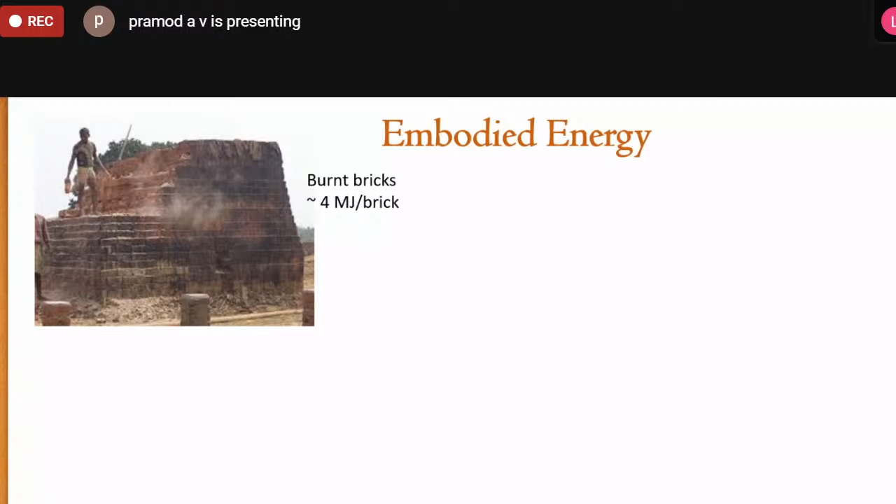We need to look at embodied energy in buildings. What do we do here? We try to understand the materials and see what kind of energy input is necessary. For example, burn brick needs quite a bit of fuel, whether coal or firewood, relating to around 4 megajoules per brick. So is there an alternative? That's the question. Then look at steel production, which consumes about 28 megajoules per kg, and sand and aggregates also consume energy.

Glass consumes 16 megajoules per kg. This is interesting to understand. When glass is used in a situation like Bangalore, where summer temperatures rise to around 36 degrees centigrade, how do you look at the building performance? Glass allows light and also allows heat. So the issue is that we heat the building and then need air conditioning to cool it.

Our energy costs are going to be much, much higher. So is it an intelligent way of designing buildings? In cold countries, maybe Western countries where temperatures are less, they use glass to heat the building, many a times calling it a solar room. So their requirement is different. They have to reduce the consumption of energy in terms of heating the building. But I don't know why we are using too much glass, and glass consumes so much embodied energy.

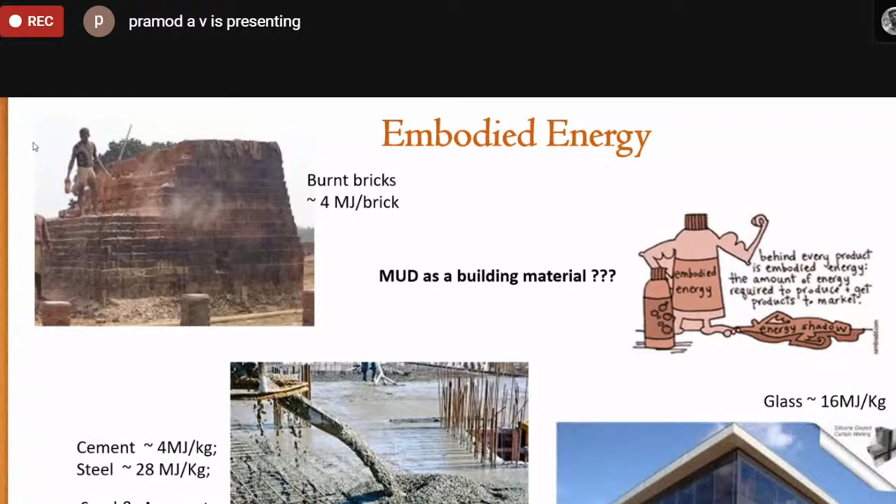So all these lead us to look back and understand what is it we should look at. Mud as a building material, why not? So how do we look at this issue? We will look into the techniques of stabilized mud as an alternative to burn brick. What happens here is cement and lime get used as a stabilizer, and there is no burning.

Reduced embodied energy using cement and lime. If we quantify the energy required to stabilize the mud, we use very little cement and lime, which relates to about 30% of the energy that goes into burnt brick. So we conserve 70% of the energy used in making burnt brick.

No plastering and no painting required. That is another interesting area wherein we can reduce cost and also reduce material consumption, while getting very good wet strength and durability. This is possible - we can definitely get a stabilized mud block, or any other mud technique, that will give us the required wet strength and durability.

But it is good to understand when... sorry. Oh, I see, I think there is... are you able to view every slide properly? Yes sir, the screen is visible. Okay, full screen is visible. Okay, last two points like plastering and painting not required, and good wet strength.

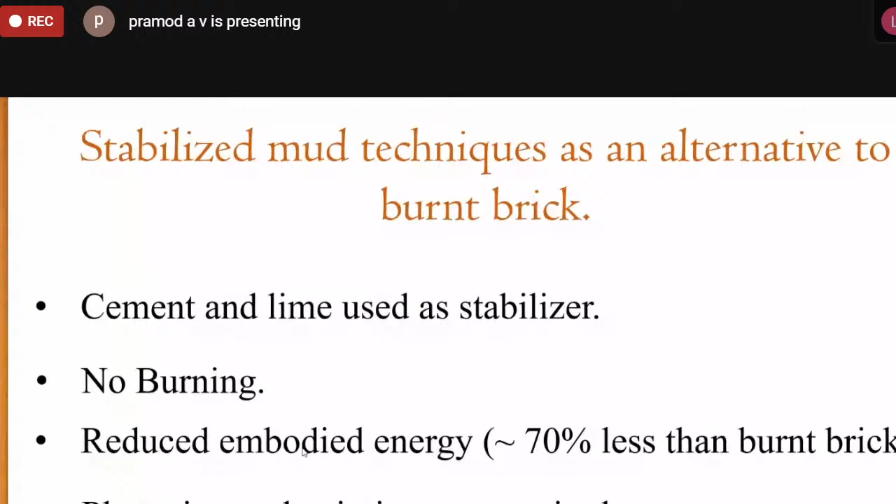Absolutely no problem, welcome everyone again back. So we will continue where we left off. Your slides are visible, sir, there is absolutely no issue with the presentation. Okay, we've been able to see all the slides. Okay, thanks for the confirmation.

So what we can do is probably look at embodied energy in buildings. We have structural systems - we can call it RC frame building, frame structures, wherein we have reinforced concrete footing, then reinforced concrete columns, beams, slabs. When we look at the embodied energy in an RC frame structure, it goes anywhere from 2 to 2.5 gigajoules per meter square of construction area. Whereas when we look at load-bearing masonry, the embodied energy consumption comes down to half of the frame structure. This is very revealing, and it only raises the question: should we need to revive load-bearing masonry buildings? This is a question we need to answer today.

In terms of sustainability, when we talk about sustainability, we need to look at the embodied energy of the building first, and then we can go on to the rest of the issues related to the activities which take place after occupying a building. So the very first thing is the embodied energy. When we look at embodied energy, there is a very clear-cut reduction in load-bearing masonry structures. So there is definitely a need to revive this and see what we should do, how do we take it forward.

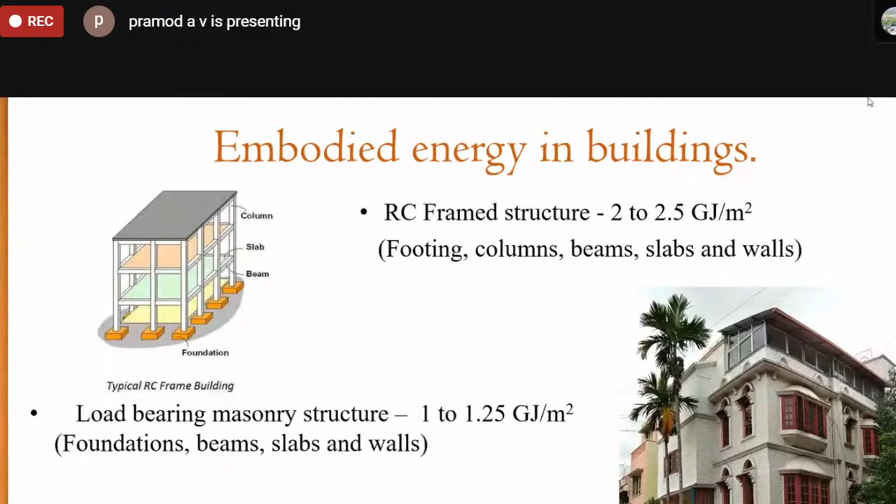I have to share my own personal experience with this technology of stabilized mud construction. I was working at the Indian Institute of Science with Professor Jagdish, and in '87 I decided to build my own house like anybody else who wants a home. This was in Jayanagar, 9th block. All the blocks were made at site itself, so no transportation of bricks, using a manually operated press with soil, cement and lime. I completed it in 1988.

When this construction was going on, I had a lot of visitors curious to understand what was happening. Some free advice also comes, as you know, when you are building your own house - people will come and tell you whether it is good or bad without being invited. So people told me, you are building with mud, it will collapse during rains, and your hard-earned money will be wasted. However, some other curious people took a block without my knowledge and immersed it in water for 2 or 3 weeks. They came back and said the blocks looked fine, there was no problem.

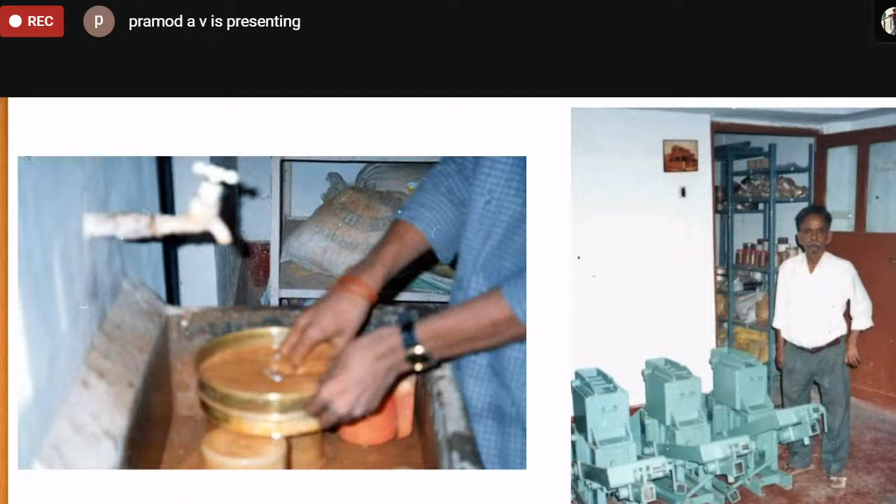Coming to the testing lab, we do soil testing, all based on R&D work carried out at ASTRA with Professor Jagdish helping and guiding us. We have a testing laboratory where we test soil from different places all over India and abroad and give them a mixed proportion. Then we have manually operated presses called Mardini. Mahimaya got established to sell this manually operated press, a very good quality press.

We all know wet strength is important, not dry strength. When you immerse the material - whether it's a bond beam, concrete or anything - for saturation for 72 hours, then put it in a testing machine and load it to failure, you look at load per unit area as the strength. We understand that the minimum compressive strength required is around 3.5 MPa. Pramod will go into the details later, just to give an idea.

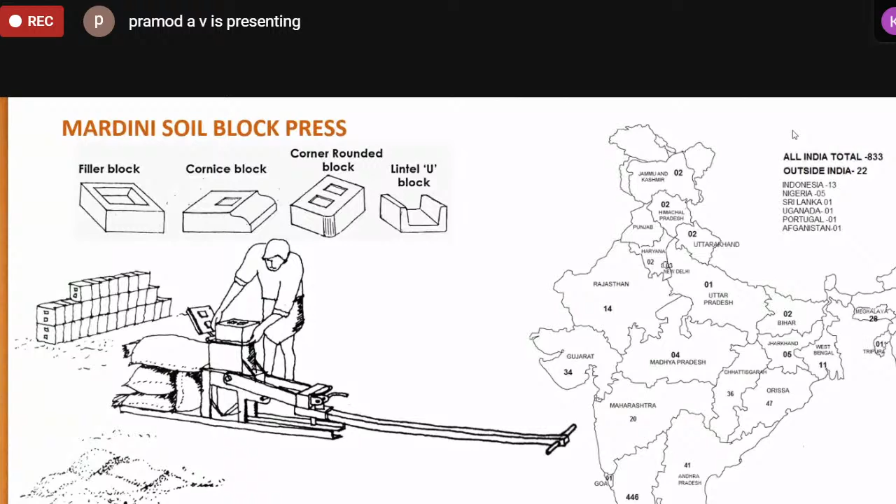The Mardini soil block press has been used all over India - there are about 850 and more machines all over India and abroad making these stabilized mud blocks. We have given a lot of training, which is very important.

We have also designed mechanized and semi-mechanized presses, where manual operation is limited to mixing and stacking blocks. This is a completely mechanized press on the right side, producing blocks. This is a factory established a year back near Nandi Hills in Bangalore - they make blocks and sell them. So blocks are available, and centralized production is also possible. This is just to show the potential of the technology.

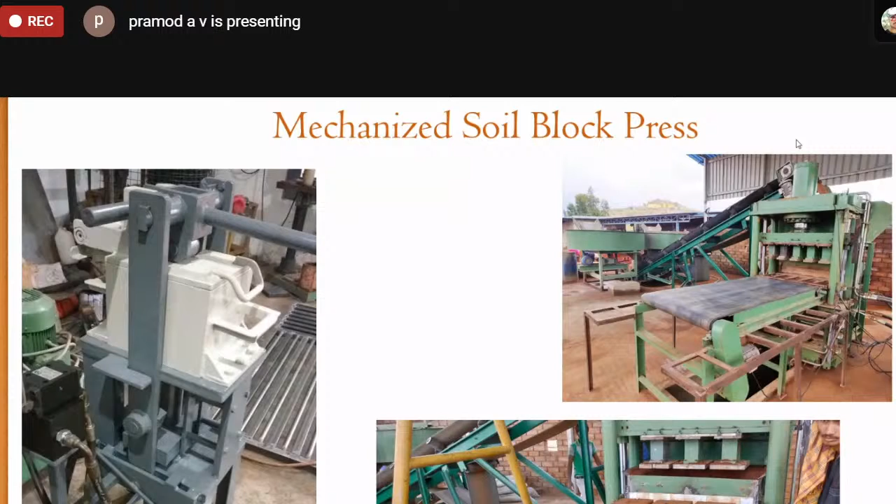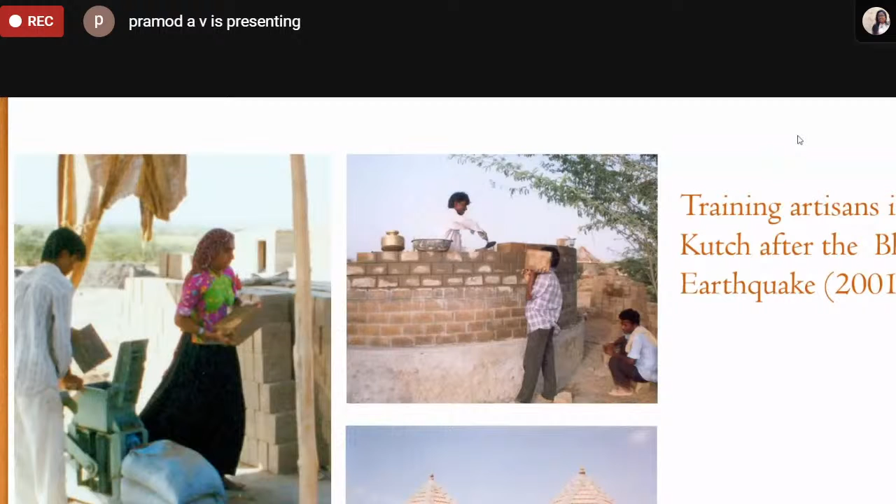Looking at training, we have been involved in many training activities for artisan on-the-job training. This is very, very important. We need to work with artisans - we don't want to call them laborers. Artisans' livelihood is very important. We need good skills, and if that is necessary, we need to train people. So we have taken on-the-job training of artisans very seriously.

This was after the Bhuj earthquake in 2001. I was there when the earthquake shook and I witnessed many collapses, both frame structures as well as load bearing. Buildings have to be designed taking into consideration issues related to earthquakes. It is possible to design a frame structure for earthquake prone areas, and also possible to design a load bearing masonry structure in earthquake areas. This is how it happened - there were about 10 to 15,000 buildings built of stabilized mud blocks in the Kutch area.

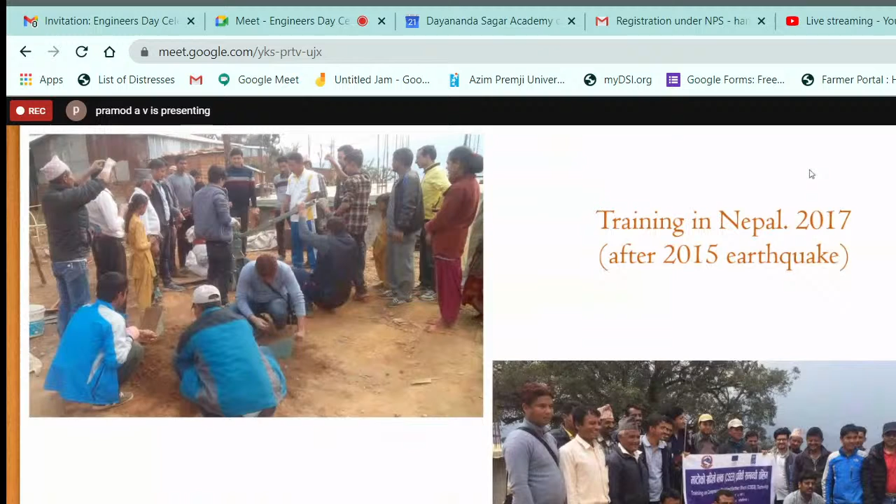This is after the tsunami in 2004 - again, earthquake is an issue. As you can see, on-the-job training of artisans happened in Indonesia, in Banda Aceh in 2005. Several houses were built with plinth band, sill band, lintel band, and roof band with vertical reinforcement so that the building performs well during earthquakes also. Again, after the 2015 earthquake in Nepal, we have been helping few NGOs and training artisans there.

There is a misconception that you need interlocking blocks for earthquake resistance. What you need is an excellent mortar which binds the blocks properly, and horizontal bands, and maybe vertical reinforcement depending on the earthquake zone.

We conduct hands-on workshops - this is very, very important - wherein we invite people who are interested. There is no pre-qualification; we do it with both theory and practicals. November 6th is another workshop we are going to have this year. So we invite whoever is interested to participate and understand. Very informal discussions happen, and a lot of question and answer sessions happen.

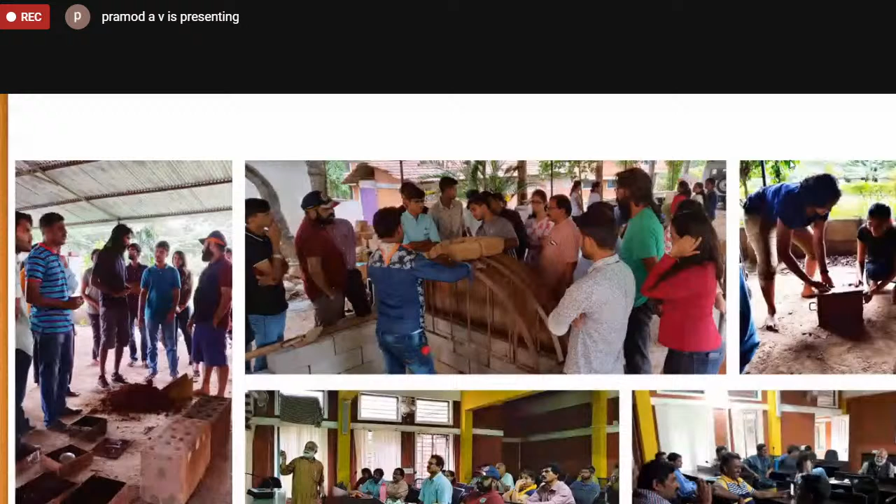We also have a 3-day workshop, not only on walling but roofing technologies also. This is taken from the Grama Vidya NGO, where we are involved in conducting a 3-day workshop held in Kaushalya Shale in Kengeri. There are few pictures of students and others trying to build walls, masonry, ramparts, and all. With this introduction, I would like to leave it to Pramod to take it forward.

One of my main interests is to see how best I can spend time with youngsters and see how they can take it forward. This is very, very important. We want to get a better hold on what is sustainability, how do we take it forward, how do we integrate many of the alternative ideas into a building.

So now I leave it to Pramod to take it forward into the details of the technology - how the block is made, how rammed earth is done, how stabilized adobe can be done without a machine, cob wall construction, an age-old technique, like DVG's Mankuthimmana Kagga, Haleberu Hosachiguru. I think we need to look at what was traditional, vernacular, and what kind of improvements we can make to suit the present day contemporary requirements.

This is something which is very, very important. Mud concrete is another area wherein we are seriously working, wherein we can utilize all kinds of waste - whether we want to call waste a resource is debatable. You have many factories; some have fly ash as waste coming out. Aluminum factories have red mud. Foundries have return sand. Building and demolition waste is a recent phenomenon happening in urban situations. A 20 or 25-year-old building gets demolished because of lifestyle changes, and that waste gets used to fill low-lying water bodies.

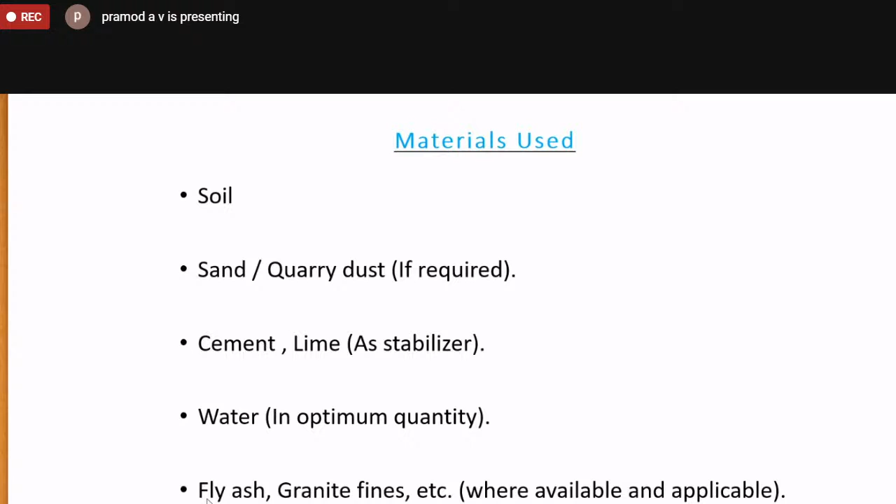We use water. As Sir was mentioning, these technologies have potential to utilize a lot of industrial waste generated from industries, like fly ash, granite fines, foundry sand, or any such things. Our recent focus is basically on trying to utilize construction and demolition waste back into construction. We'll try to look at what these techniques are in the following slides.

First, if we try to understand how soil is, soil can be broadly classified as expansive and non-expansive soils. We focus all our attention today in this presentation on non-expansive soils.

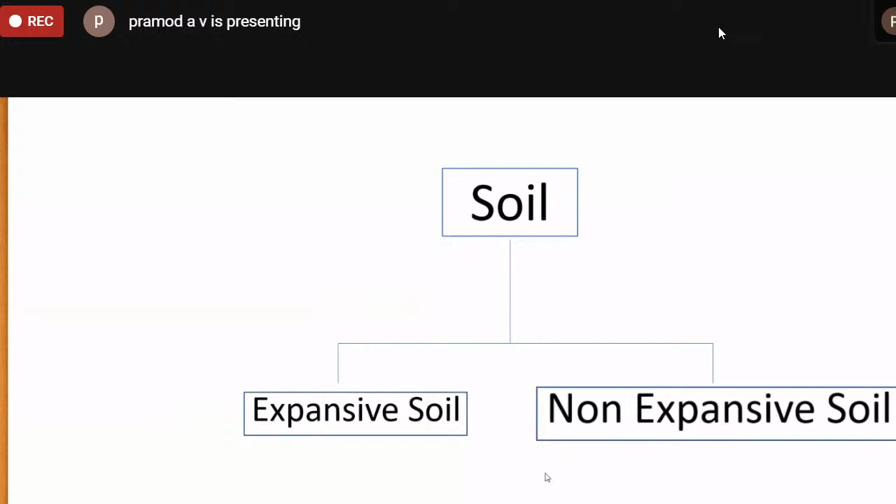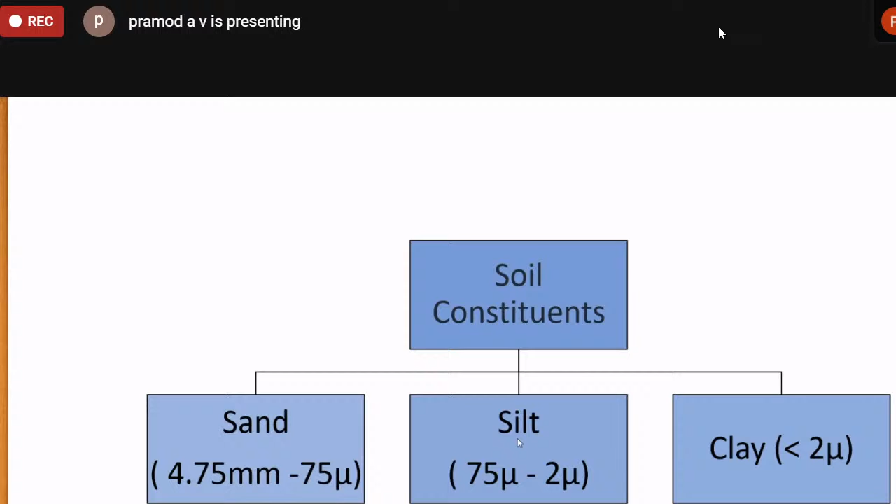Soil basically consists of sand, silt, and clay, classified depending on particle sizes. These are the recommended percentages of sand, silt, and clay for using in these kinds of techniques. For example, if we go towards the northern part of India, we have very high silty soils, so we can allow silt up to 35%, limit the clay up to 15%, and sand would be around 60 to 75%.

In today's presentation, we are going to share our experiences working with these four techniques. The first is stabilized mud block, where you use a machine to make blocks at the site so you avoid transportation. We can also use the same mix to build a wall in situ instead of a precast brick or block - this technique is called stabilized rammed earth. Then we can make bricks or blocks using a very simple hand mold, called stabilized adobe or cob technique. The last technique, which utilizes construction and demolition waste or waste generated from industry, we have termed mud concrete.

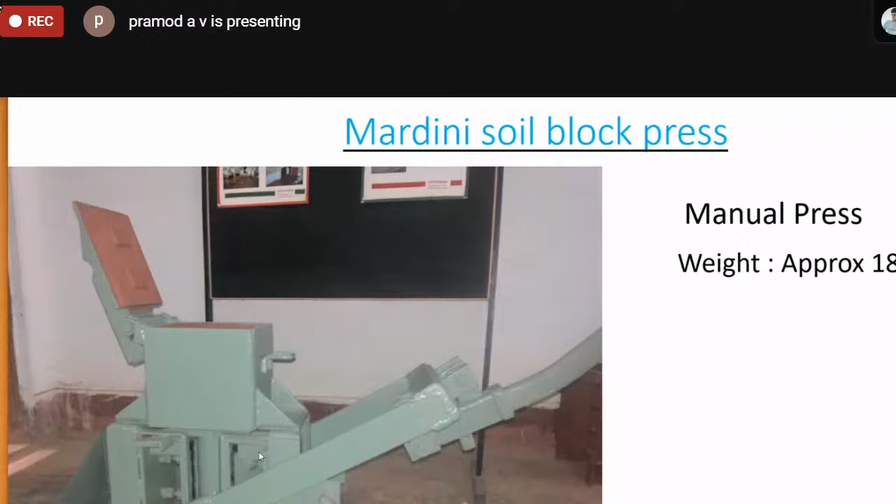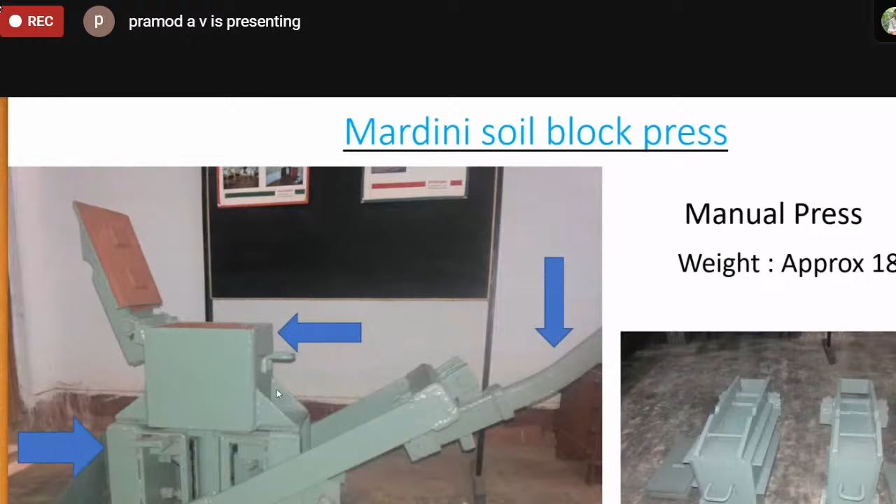We'll try to look at how we produce blocks using all these techniques, starting with the stabilized mud block technique. This is the machine used to make stabilized mud blocks, called the Mardini soil block press. It's a manual press that doesn't require any electricity. It weighs roughly about 180 kilos and can be dismantled into 3 parts for easy transport to site: a lever attached to a plunger, a basic frame, and a mold which is interchangeable to achieve different shapes and sizes of blocks.

We'll now get into the process of producing stabilized mud blocks. As we know, soil also has gravel in it, so we need to screen the gravels initially using a 4mm mesh, which is practically available. Try to sieve the soil on a 4mm sieve to separate gravel from the soil - you can also use mechanical sieve shakers. Once the soil is separated, then as per laboratory proportions, you try to utilize the soil.

Wherever sand is necessary, we try to add sand in the required proportion, and to that you add stabilizer. Stabilizer is cement in the majority of cases, or a combination of cement and lime. Minimum 7% cement is recommended as a stabilizer, and depending on strength required, the stabilizer content can vary. Like concrete, we can have different grades of blocks, starting from 3.5 MPa as the minimum requirement, up to 15-20 MPa. Recently, with advancements in machines using a mechanized press, we have been able to achieve strength of around 15 to 18 MPa.

Once the soil, sand, and stabilizer are mixed in dry condition like this, you add lime slurry. Instead of adding water, we add lime slurry, which is produced by utilizing burnt limestone and converting it into slurry form. The amount of lime slurry added to the mix is roughly about 12% of the total mix, and the amount of lime which goes into that will be hardly around 0.2 to 0.3%.

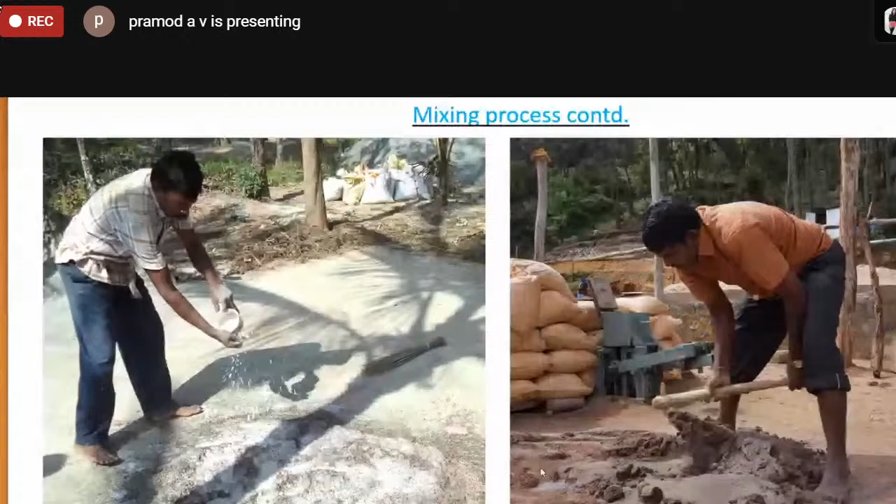Once the modified mix is ready, you weigh that particular mix before pouring it into the mold to ensure proper density is maintained at the field, because density is directly proportional to the strength of the block. If we can achieve a constant density at the field, we are ensured a good compressive strength, whatever is desired.

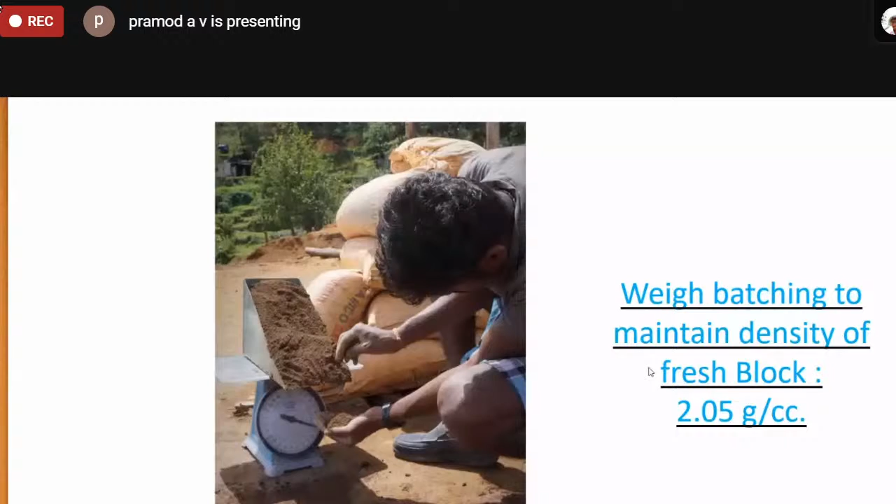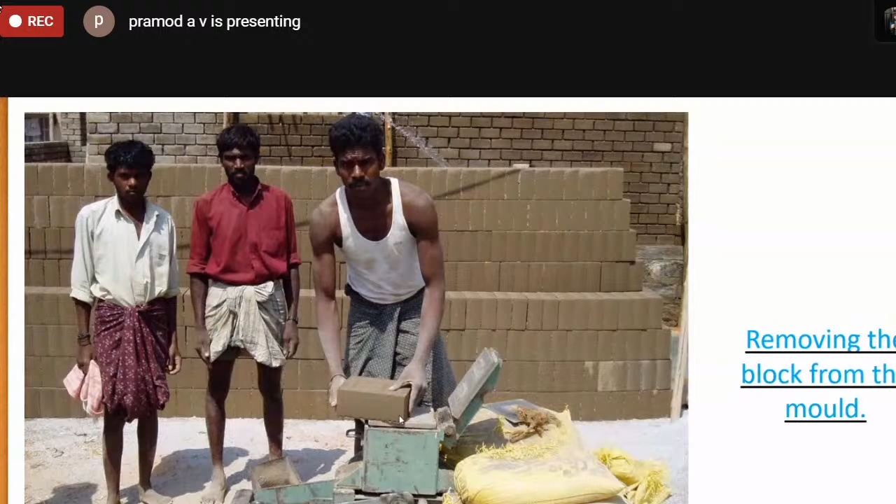Once the mix is weighed, we put it into a mold like this, and then you have a compaction stroke. When the lever is pulled down, the plunger moves from the bottom and compacts the mix under a pressure of about 12 tons. Once the mixture is compacted, it is immediately taken out and the block is ejected from the mold like this, and then you keep the blocks for stacking.

The fresh or green strength of the block is given by the clay present in the soil. When we stack, we take precaution such that the blocks are stacked close to each other in order to avoid evaporation losses.

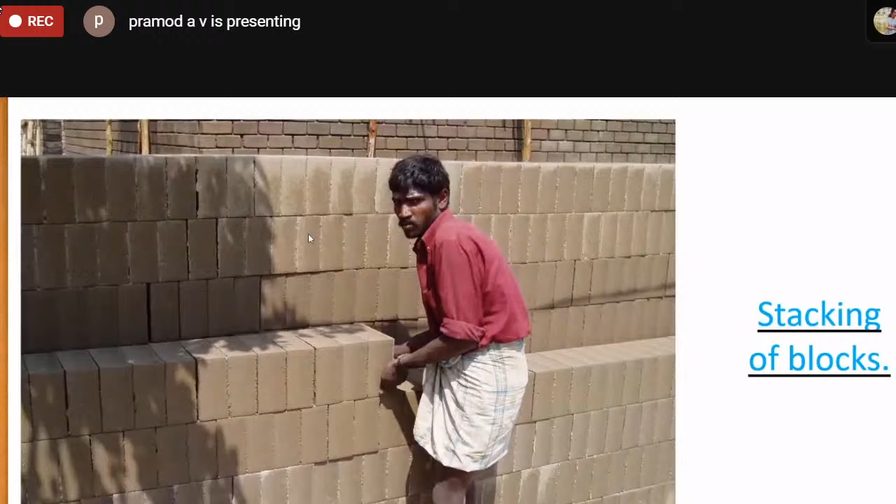We try to cure the blocks. Here it is not being burnt, we cure it because we have added cement. Wherever we add cement, we try to cure the block for about 28 days. But after 10 days, you can start using the blocks in construction because we add mortar in between the blocks, and the mortar also gets cured in that process along with the blocks. So this is the process of curing at the site. You can use gunny bags, hay straw, or polythene sheets. Any of these methods can be implemented in the field condition.

Normally, we design masonry walls. Like in regular concrete construction, we design the frame; here, we design the walls to take care of the loads. So there are two methods of design in masonry. We fix the wall thickness and then ask what should be the strength of the block to take that load. Or the other way around, you already have a material with a known strength, then you back calculate what should be the thickness for that particular strength to take care of the loading condition.

In cases like this, we fix the thickness to around 230 millimeters or 9 inches and back calculate what should be the strength of the block required to take care of the loads.

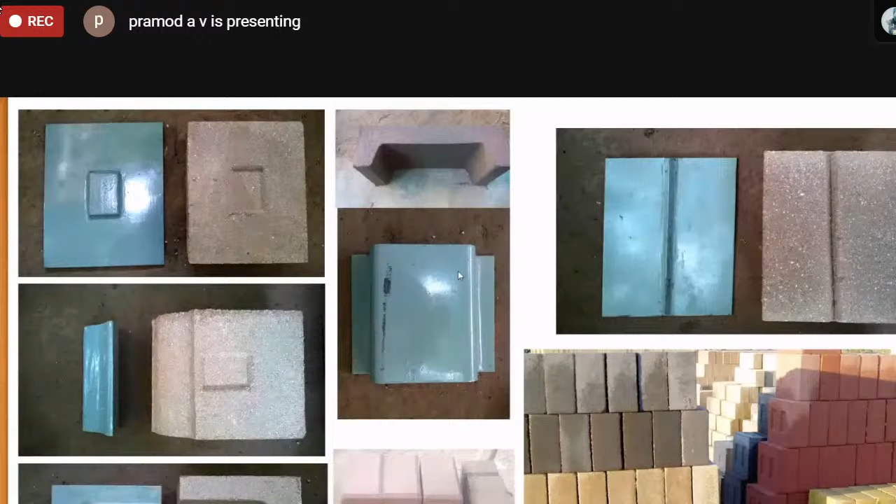So these are the possibilities with the same mold. You have inserts to produce blocks of different shapes which are used for different purposes.

You can also have blocks with pigments, like red oxide, black oxide, yellow oxide, or if you have any product from industrial waste, like aluminum factories producing red mud, even that can be utilized as a pigment in making blocks. These are all the possibilities. You can also do interlocking blocks by having a specific mold.

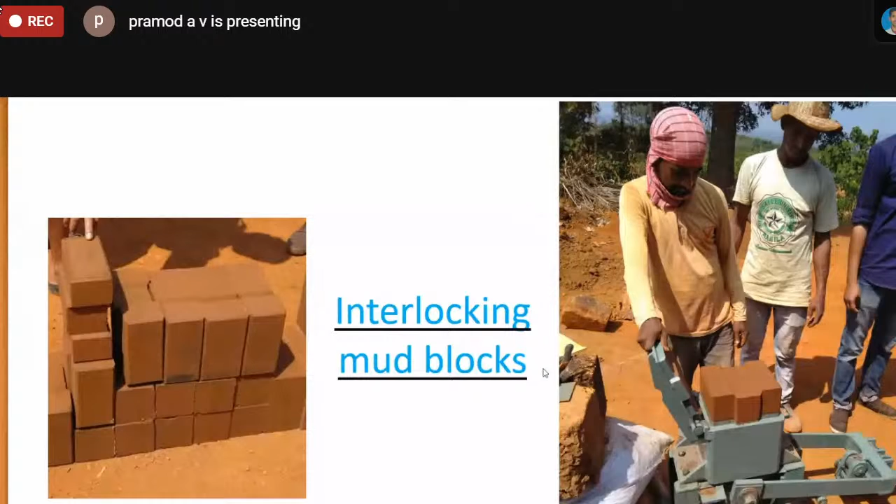One important thing we need to address in today's context is earthquake resistance of any structure. We can make masonry a good earthquake resistant building by introducing features such as horizontal and vertical bands, depending on the zone in which we are working.

For example, if we come to a zone like Bangalore, which is in zone 2, the least prone zone, we need to introduce bands at plinth and lintel level, which is more than sufficient to take care of lateral forces. As we move to higher earthquake zones, the number of horizontal bands increases, along with the provision for vertical bands as we move to the severe zones.

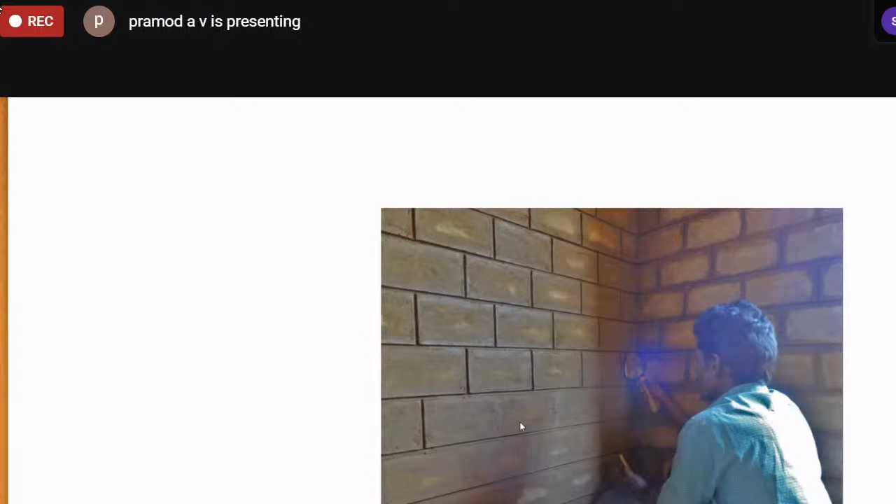In all our buildings, we normally do not plaster. We always say plastering is done as an excuse for bad workmanship. If you don't build a wall to a proper plumb, the common excuse is to plaster both sides to bring it to a proper plumb. So whatever the wall thickness, either 9 inches or 8 inches, becomes close to 10 or 11 inches after plastering.

We normally don't prefer to use cement mortar directly because once we add water to cement, within half an hour that mortar mix has to be consumed. But practically, on site, the mortar will be used for a longer period, more than 3 to 4 hours. So when we add materials like soil, quarry dust, or sand, it delays the setting time by another 1 to 1.5 hours. These materials can also hold moisture within them, which provides proper bonding and helps the hydration process.

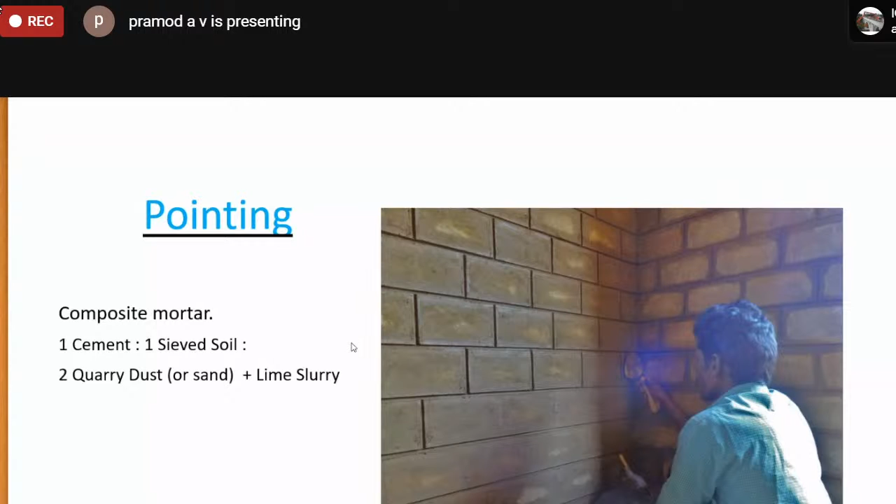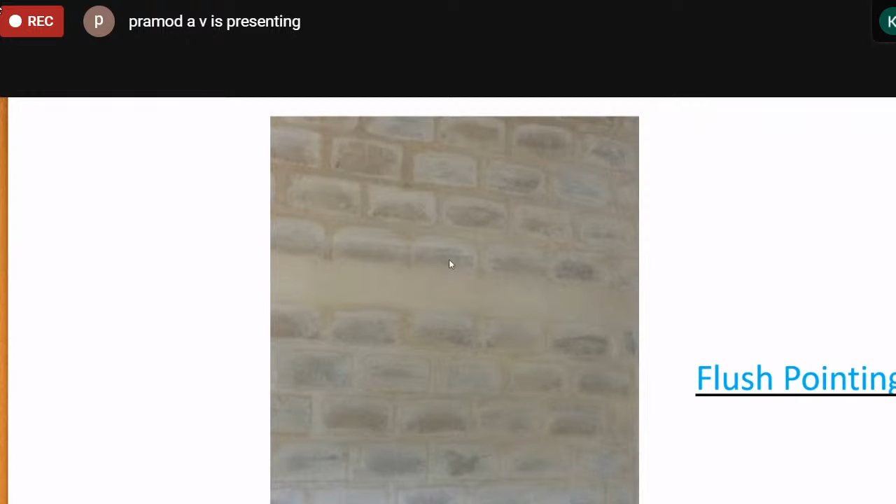So there are two types of pointing. One is groove pointing, where each and every brick is demarcated. The other is flush pointing, where you seal all the joints flush with the block so that the wall surface is flush. By doing this, we are trying to avoid cement to a larger extent.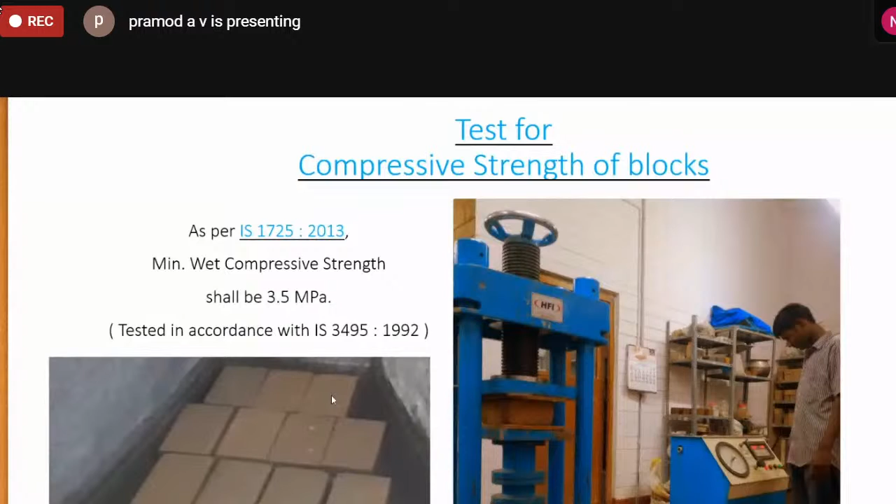As Sir was mentioning, we have a code for using mud blocks in construction - IS 1725, which was revised in 2013. It specifies a wet compressive strength of around 3.5 MPa. Wet compressive strength means the blocks were saturated for 48 hours before being tested under a compression testing machine. This simulates the worst condition the building can undergo during a flood - once submerged, it should still have enough strength to carry the loads. The minimum strength obtained should be around 3.5 MPa.

This strength will vary depending on the loads it experiences. For example, if you want to build a 3 or 4-storied structure, the same strength can go up to around 10 MPa. So we can do a mix design in such a way that we get blocks of different strength by modifying the proportion.

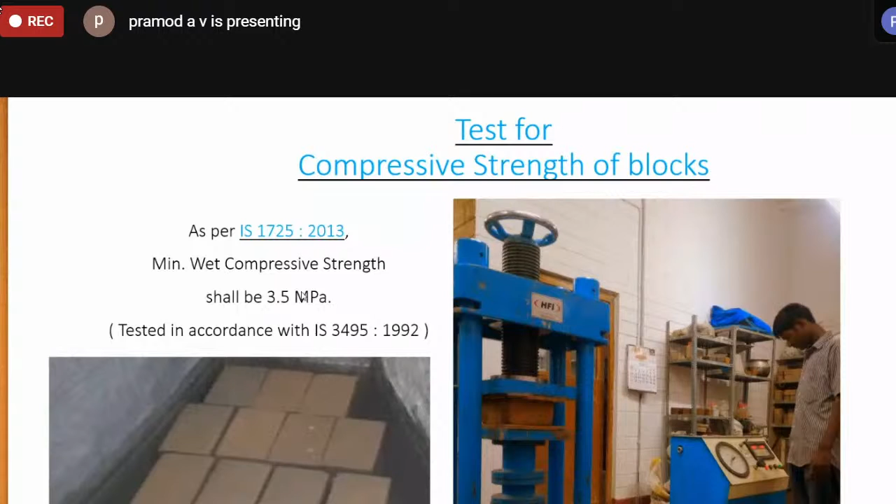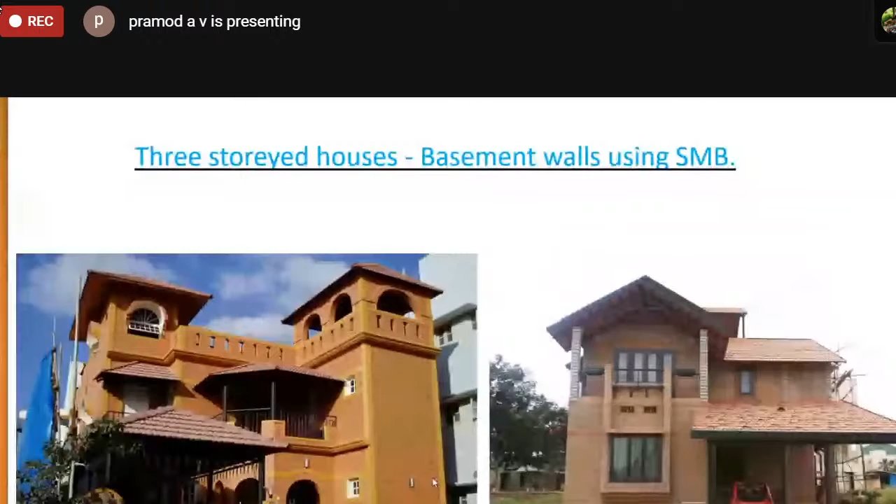So this is another example of a 4-storied residence in Bangalore. We have used a combination of stone and mud block. This is the central courtyard part, done in the basement with size stone masonry. We have used stone columns with chapadi stones, stone slabs of 4-inch thickness, 9 inches width and 2 feet or 1.5 feet length. 4 columns support the central courtyard portion.

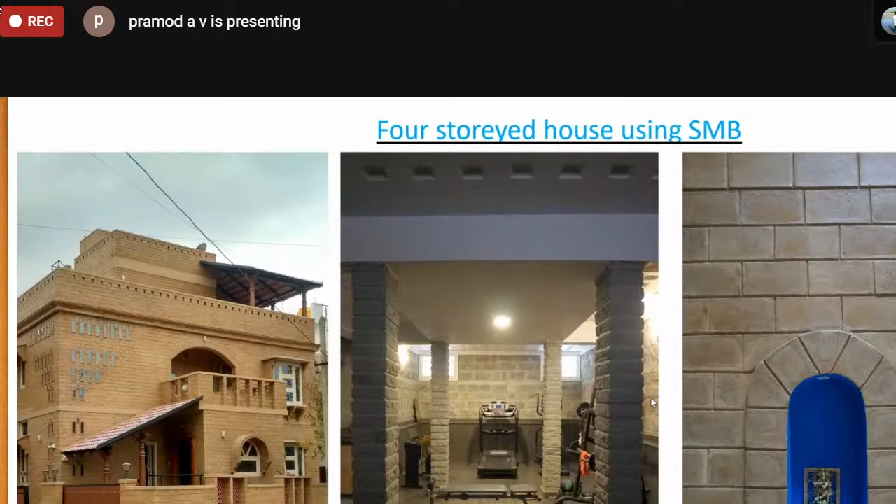Then blocks of different shapes have been used to achieve different niches in the wall. This is another recently completed farmhouse in Shoolagiri where we have extensively used even mud blocks for roofing elements. You can use arches like this to cover up openings so that you can avoid reinforced concrete beams.

So this is one of the good examples we have implemented in Hyderabad. This is for a school building. Kritika Architects were the architects for this building. The school is around 12,500 square feet. It's a government school which was sponsored by private people. The entire school construction was done without centering.

So we had used concepts such as ferrocement for roofing as well as for lintels and plinth. Whatever concrete bands you see, it's all ferrocement, with reinforcement inside as an earthquake-resistant feature. The roofs were again with ferrocement. We had precasted girders with steel, and then we lifted up the ferrocement, which was also precasted at the site, lifted to position, and a screed concrete of 1.5 inch was poured above so that the roofing is also taken care of.

After this, we now have another school coming up close to Hyderabad. It's about 20,000 square feet with the same techniques. So we have completely eliminated the centering from the building.

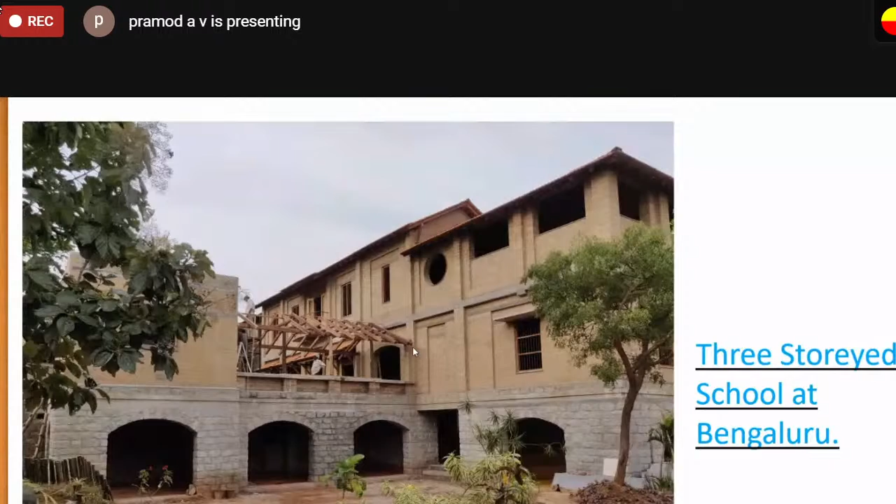So this is another school building on Kanakapura Road. It's for Shibumi. L&S Architects were the architects for this building. A lot of masonry roofing techniques have been extensively used in these structures. We have masonry domes, masonry vaults, which have been used as floor slabs. The first floor here is entirely with masonry vault, covered up on top and used as a floor slab. These are masonry vaults, these are masonry domes. A lot of things using masonry have been implemented.

So this is another school building in Tiruvannamalai. This only tells us that all these techniques can be utilized for any kind of loading situation. In fact, you have a library on the first floor and an auditorium on the ground floor, so it has been designed for the loading condition.

Then we have also done a lot of work at Gudalur, in the foothills of Ooty, where you have received a lot of rainfall. This is an example of a 4-story hospital building done there in Gudalur. The basements are done with stone, and the upper 3 floors are done with mud blocks, which are 1 feet thick. All the standards to be followed for hospital buildings were followed here.

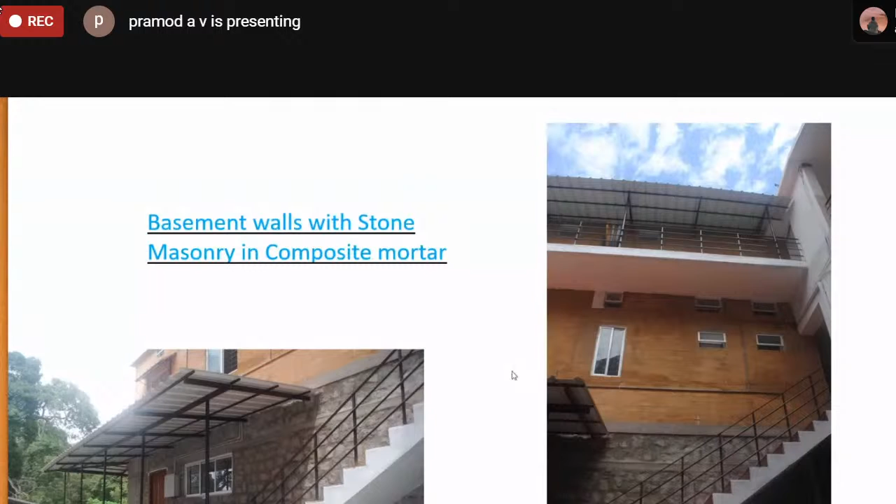With the same wall thickness of 1 feet for different conditions. So this is the first phase, and this is the second phase of the same hospital.

So this was done in Maharashtra in Govardhan village in Wada, done for ISKCON. Biome was the architects for this building. A lot of their construction was done using stabilized mud blocks. We have implemented even a masonry staircase where you don't have steel and concrete in it; it is built out of bricks and mortar. This shows we have quite enormous potential with masonry, and it is up to us how we try to explore those potentials. Here in the roofing, we have jack arches with mud blocks. You can see an arch to take care of the openings. A lot of things have been tried.

So as we were mentioning, we can utilize a lot of industrial byproducts in these kinds of techniques. This is an example of utilizing foundry sand from Brakes India Private Limited in Sholingur, with whom we have been associated for the past 2.5 decades. Even today, we are trying to do some work with them. They have a foundry division where they get sand from the furnace called return sand. It will be very blackish in color, so disposal of such sand was a major issue.

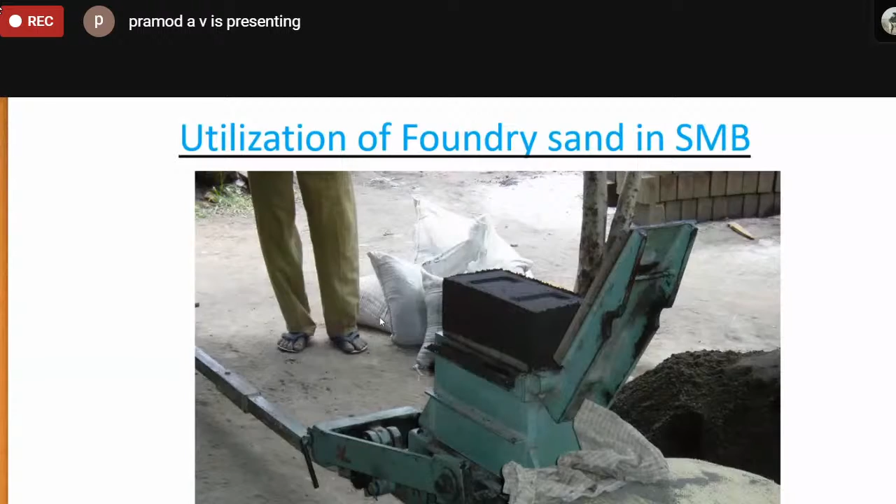So we tried to test that sand and arrive at a proportion of mixing it with soil and making mud blocks out of it. You can see the color of the mud block is very blackish because we have used foundry sand. This is a school building which we have built using the same blocks. It's a 2-storied structure with a provision for one more floor.

Then we have used mud blocks extensively. This is their administration building, and this is their meeting hall with filler slabs, again with mud blocks. This is the latest extension of their admin block, where we have done roofing also with mud blocks with jack arch roofs. Another example of utilizing mud blocks on a large scale is with Nirmiti Kendra.

This is done in Devanahalli for Bangalore Nirmiti Kendra, which is a rural Nirmiti Kendra. Their entire admin building was done with alternative techniques. You can see a masonry roof at the entrance. This is a vaulted roof. Then you have masonry jack arch roofs. All kinds of techniques have been utilized in this building.

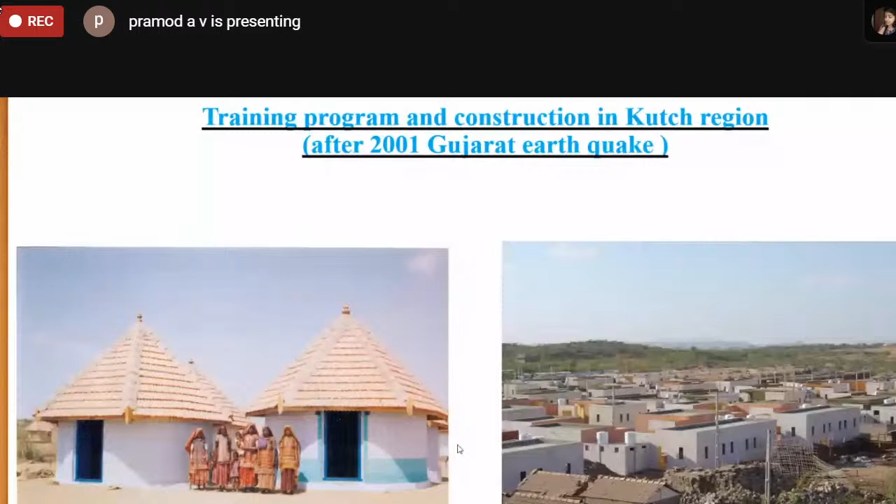So we have also used stone in combination with mud blocks where we have a lot of loads. As sir was mentioning, in Gujarat, post-earthquake, we have close to about 15,000 houses using all these techniques, which we'll be discussing in today's lecture.

So we have seen making of mud blocks and trying to build a wall. So there is another technique called stabilized rammed earth, where you don't do blocks. Instead, you try to build a wall directly.

So many of the architects are fascinated about this kind of technique because they can create variation in patterns in the same wall using different colors of soils.

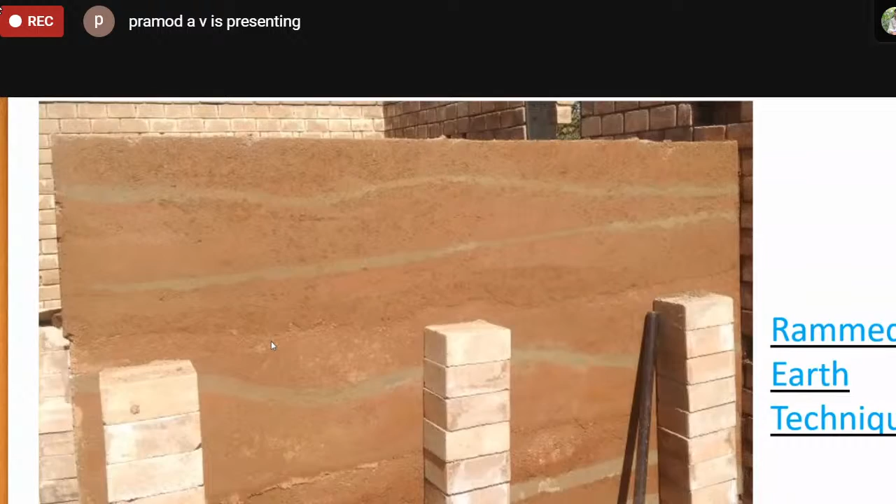So the technique is very simple. We use a mold for ramming the earth inside. The mold can be 2 feet in length, or it can be 4 feet, 8 feet in length, or even for the entire structure, if you have a repeatability of structure. Then you use rammers, which can be circular or square in shape, used for ramming the earth inside the mold.

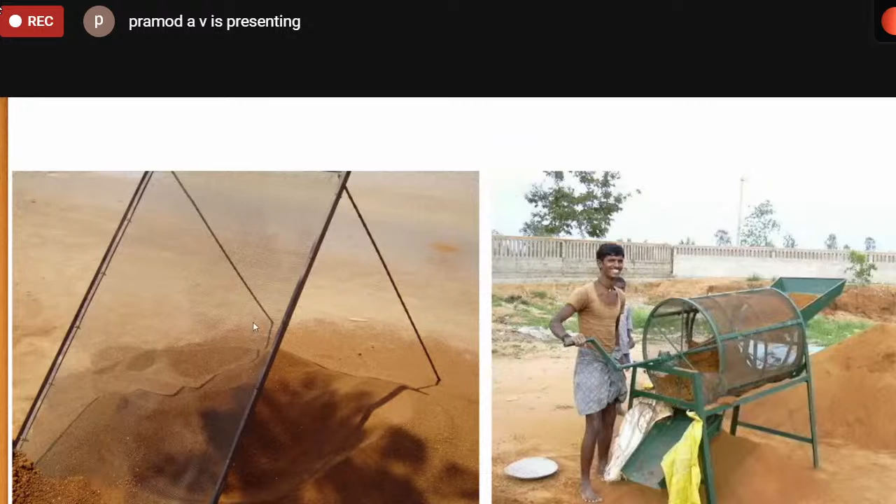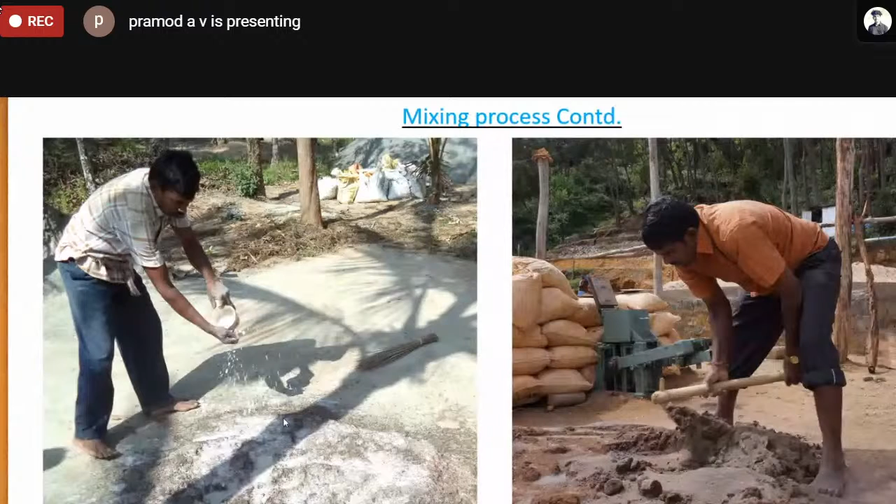So the process of obtaining the soil mix is similar to that of mud blocks. You sieve the soil, mix it with stabilizer and sand if necessary, in dry condition, to a uniform consistency. Then you add water, again about 12% of the mix, and then use that mix in the mold, pouring it in and starting to ram it with rammers.

So here, what we do is, if your mold height is 1 foot, we try to ram that in 3 layers so that you ensure proper density is achieved. You add the soil up to 7 inches, then ram it to 4 inches, which ensures the soil is compacted thoroughly. Similarly, you repeat it 3 times to complete the height of the mold, like this.

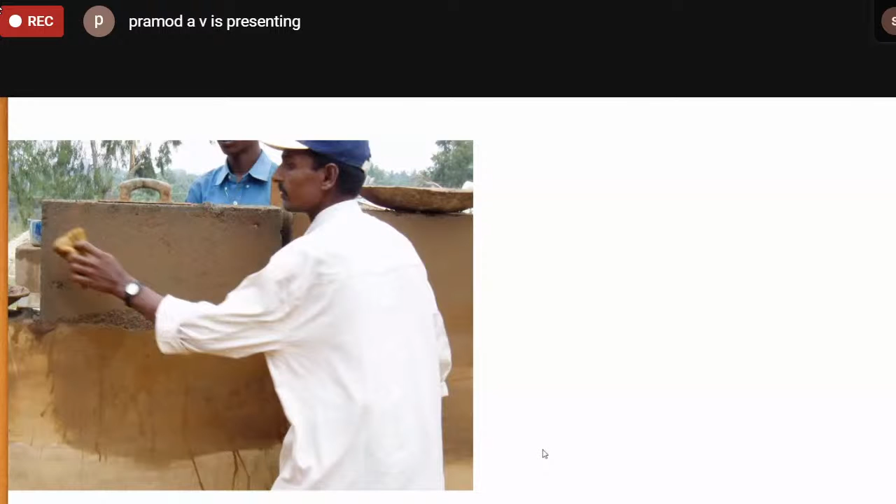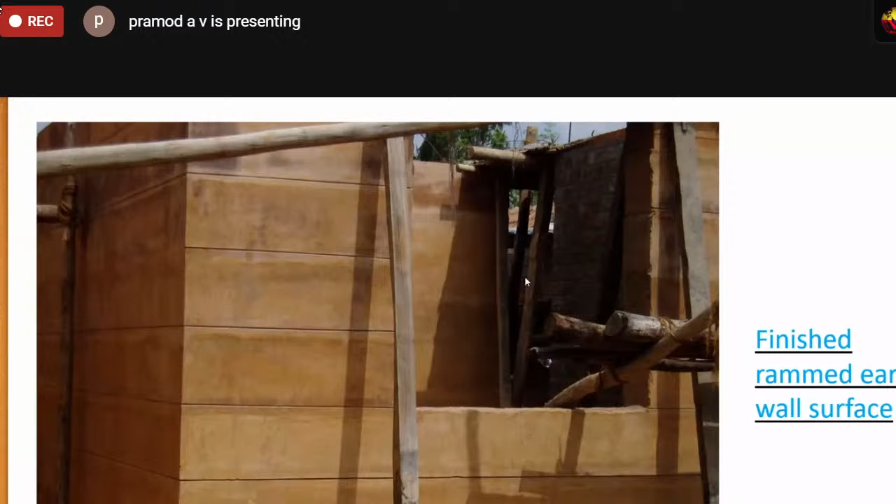So corners can be done like this. Another feature or extended application is, once you remove the mold, you can sprinkle water onto the surface and then rub it with any masonry tool like a float. You get a plastered finish like this.

So that process helps the clay coat the surface and you get a plastered surface like this. If you use different varieties of soil which differ in color, you get layers like this. It can be with any of the patterns. A lot of work is being done on this particular technique.

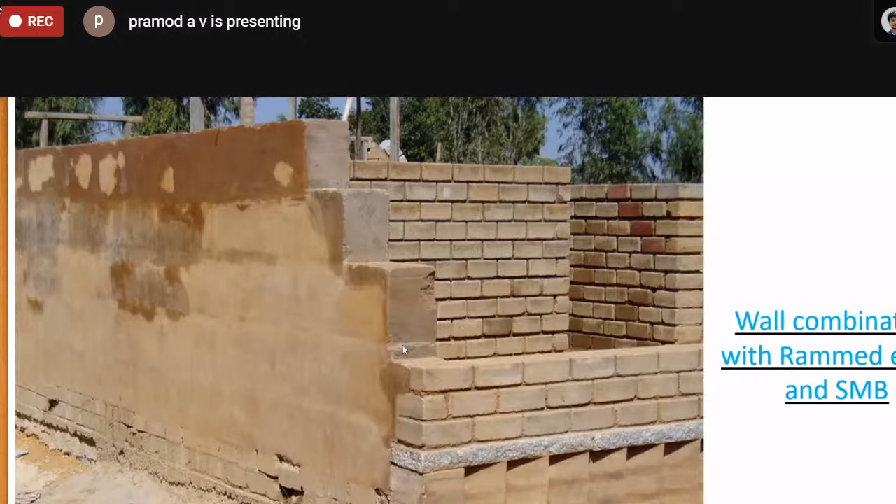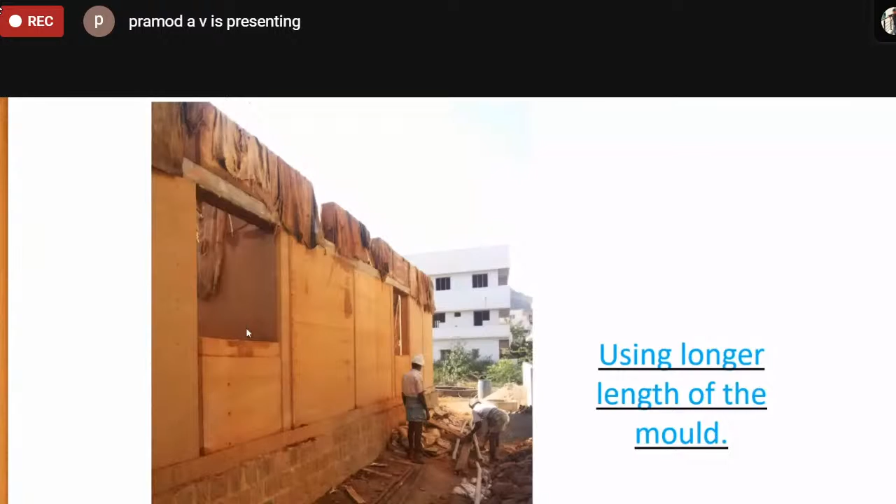You can use a combination of rammed earth or mud block or any such technique. You can use a little longer mold, which is 8 feet in length, 8 feet in height. This was an example from Tiruvannamalai, one of the earlier rammed earth demonstrations from our office in 2003. Biome was the architects for this building, and a 2 feet length mold was used to do this house.

So this is a 3-storied building. Sathya Prakash Varanashi sir was the architect for this building. This was in Rajarajeshwari Nagar. Basement is with size stone masonry, then you have 2 additional floors and a partly 3rd floor with rammed earth.

This was in Tiruvannamalai. Ajay Nityananda was the architect for this building. You can see the usage of a little longer mold. So here in one of the residences in Bangalore, Nilay Patalia was the architects for this building.

We have used rammed earth as columns. There are no reinforcements inside this column. Wherever you don't have any accidental loads, you can use this as columns in those locations. This was done in the courtyard part of the house. Square shape and circular shape columns were done to support the slabs. So this entire slab is being supported on these columns. The column dimension is roughly about 15 inches in diameter, and the square columns were 15 inches by 15 inches.

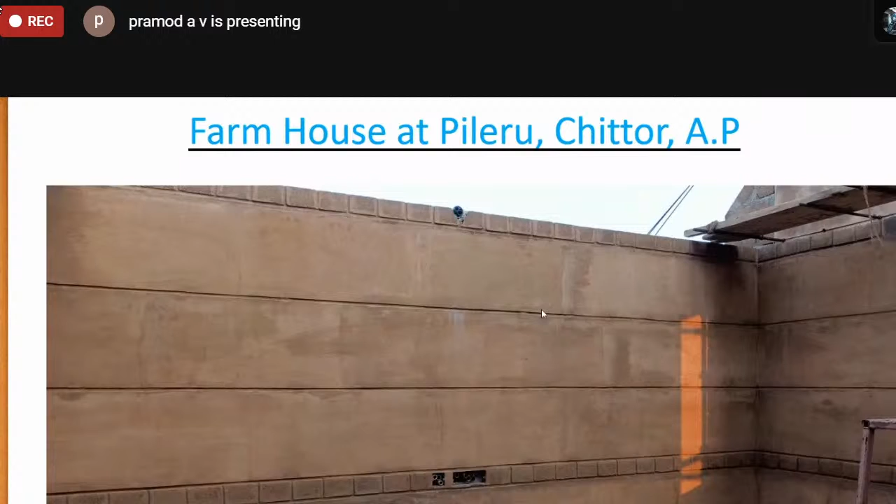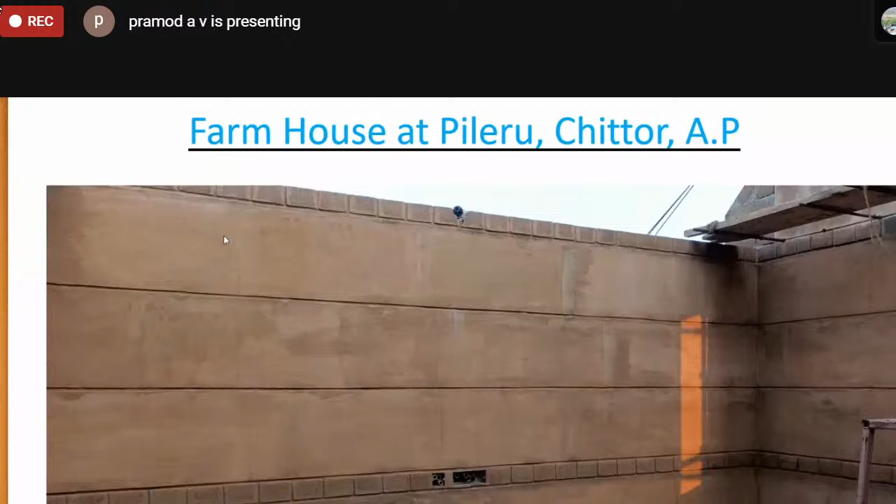So what we have done is we have used U blocks, mud block U blocks at sill level and lintel level. This has helped us to tie the building at those levels for earthquake resistance, as well as to take electrical conduits at the horizontal levels around the wall. Wherever you need vertical conduiting, while ramming the earth itself, you have pipes so that chasing is completely avoided. So you'll have a gable roof here with thatch, and you have a provision for a roof band here, again with U blocks. This building was completely done without any centering.

You can see ferrocement channels being utilized for that purpose. So this is now receiving the roof. About 9 inches to 1 feet thick thatch roof is going to be done over this layer.

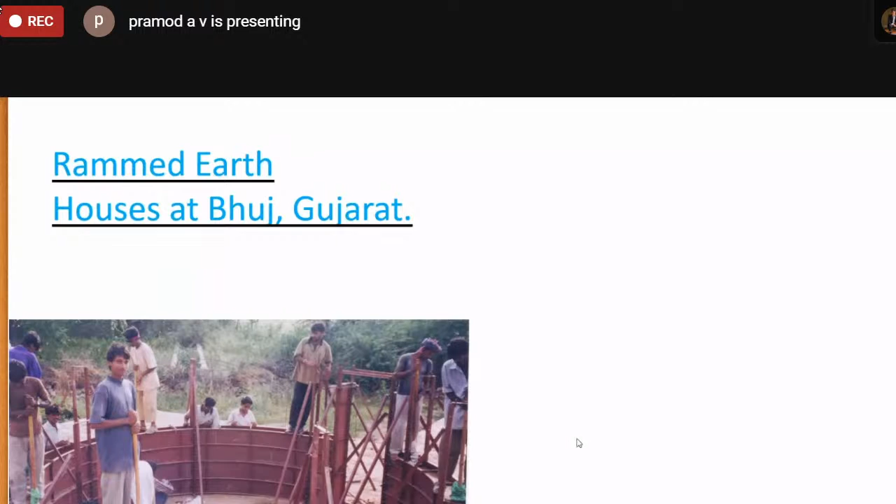So this is an example from Gujarat. As I was mentioning, if your project has a lot of repeatable structures, you can afford for a little longer mold. So here in Gujarat, after the earthquake, we had circular houses, traditionally called bhungas. This is about 15 feet in diameter, 3.5 feet in height. Within 2 days, the walls were up to the roof level. This helps us in the speed of construction. So this is how the finished bhunga looks.

So those were the two techniques. The third technique, which we are now going to discuss, is with reference to stabilized adobe or COP technique. We might have heard of the term adobe. Adobe is traditional brick, which is sun-dried. We now have a similar technique, but we have used a stabilizer to stabilize the mix.

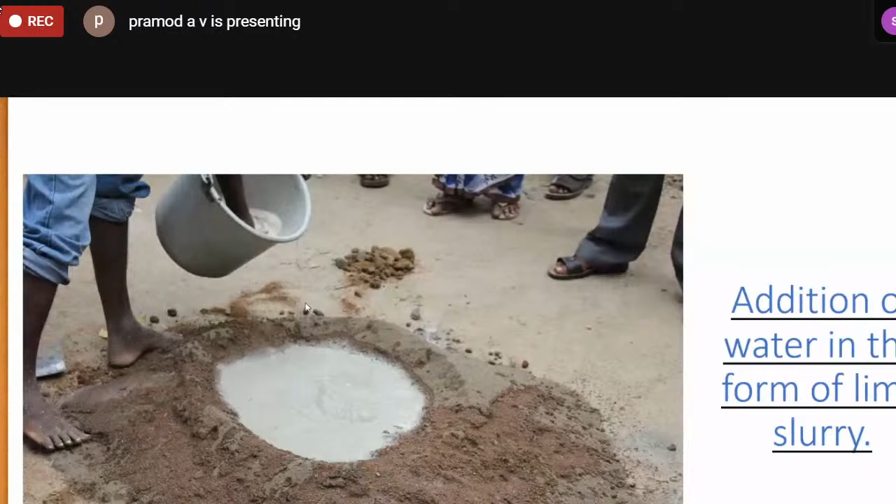So the process is like this. You add sand to the soil if it is required. You test the soil, arrive at a proportion, and then mix the soil with sand if it is required. You add cement in the dry condition, mix it thoroughly, then you add lime slurry. Here, the amount of water you add is roughly about 16 to 20% of the mix. Once that is done, you try to bring the soil to a particular consistency by pugging it with your legs. So what you do is add cement, then lime slurry, and then pug it with your legs to bring the soil to a particular consistency. It's like a potter's job where you bring the soil to a consistency and mold it to the shape, whatever you require.

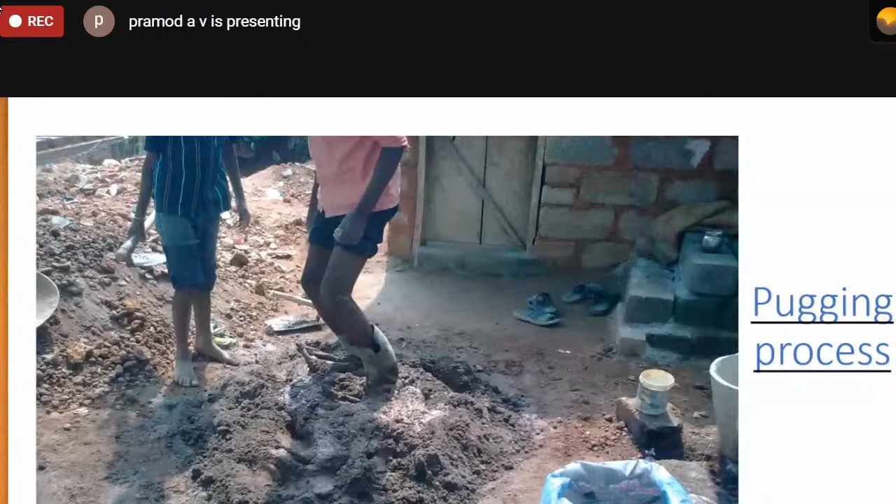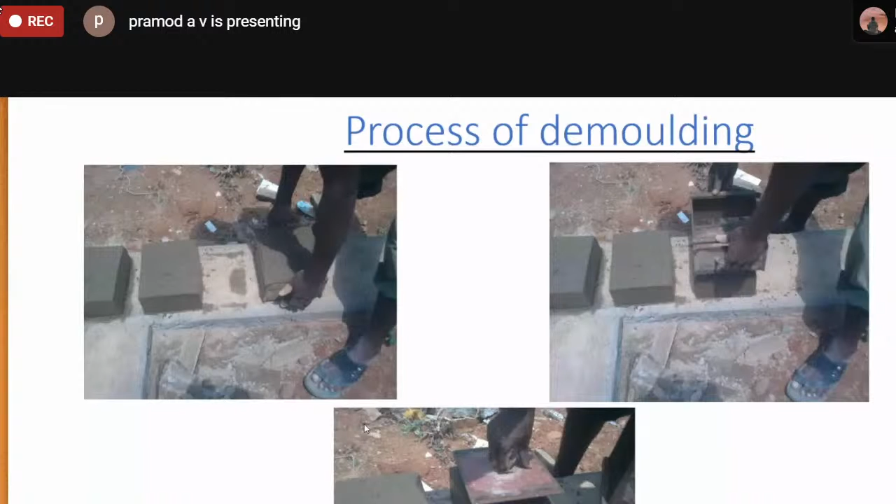So then you have a very simple mold like this for whatever dimension, it can be 12 inches, 9 inches, 4 inches, 9 inches, 7.5 inches, 4 inches, or whatever it is. Once you pug the soil and bring it to a particular consistency, you fill the mold with that soil, and then you try to demold this on a hard surface. Since we have used a little more moisture, we try to demold it on a harder surface and leave it for about 24 hours so that it gets properly dried. Cement would have taken its role by then and it becomes harder like this. After 1 day, you can keep the blocks for stacking and cure it.

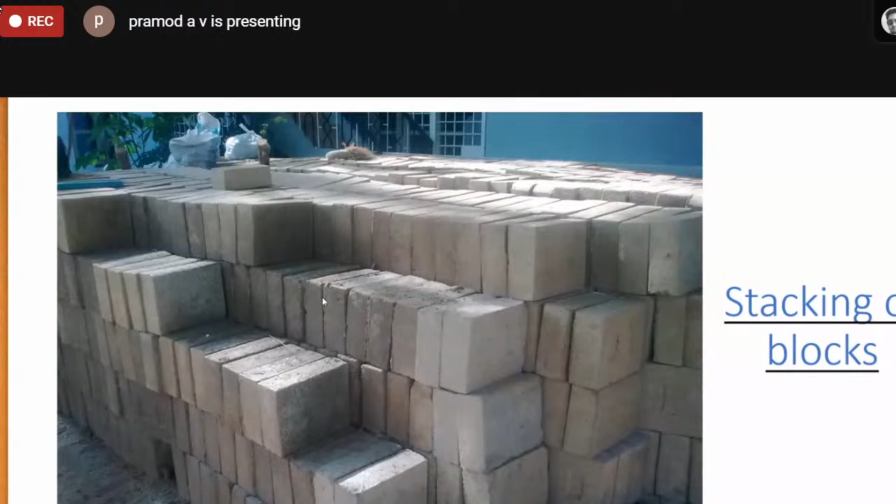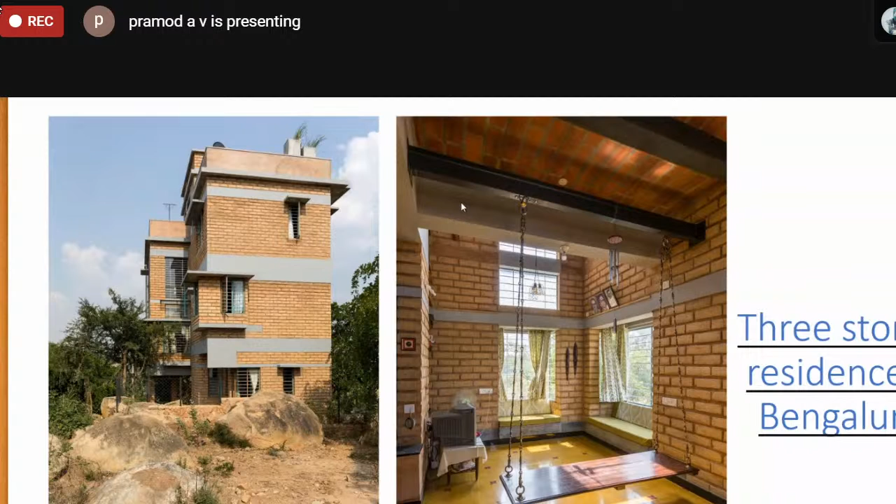This is another residence in Bengaluru where we have used the same adobe even in the roofing for masonry walls.

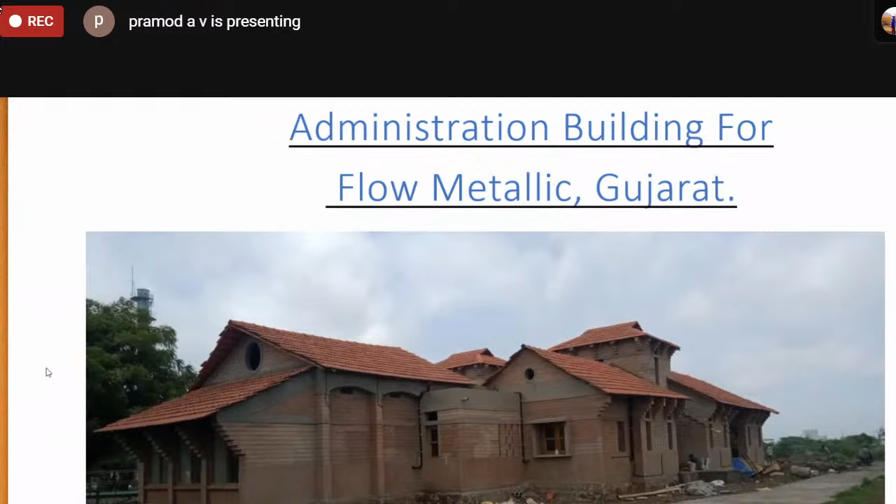We also have a project which is getting completed in Gujarat. This is again for TVS Group. It's called Flow Metallic. Their administration building was completely done using stabilized adobe technique. This is now in the finishing process, so it's an option just to paint the surface, as I was mentioning, without doing any plastering.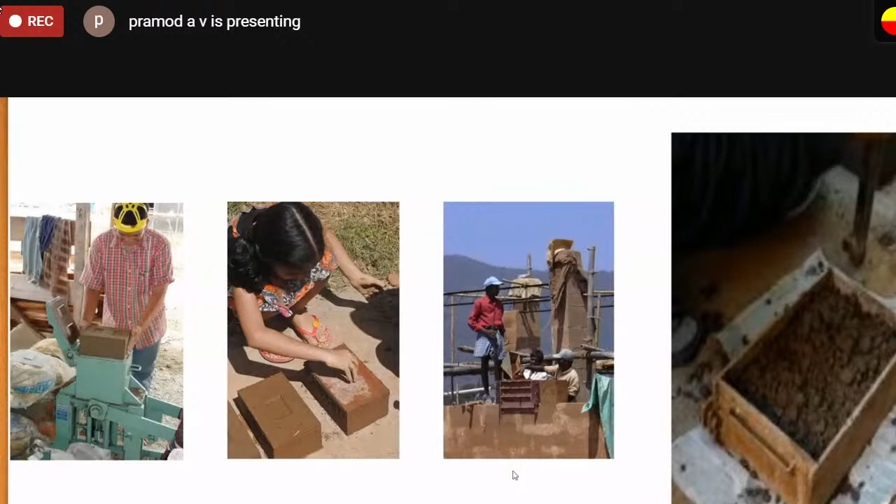We now move on to the last technique, which is called mud concrete. This technique, as I mentioned, is basically arrived at to utilize a lot of construction and demolition waste which are being generated. In today's context, a lot of people demolish olden buildings, not because they are structurally bad, but due to change in lifestyle. And we don't know where that debris goes. It can go into a landfill, it can go to cover up a lake, or things like that. So according to us, there is a potential to utilize all these things back into the construction without sending them out of the site.

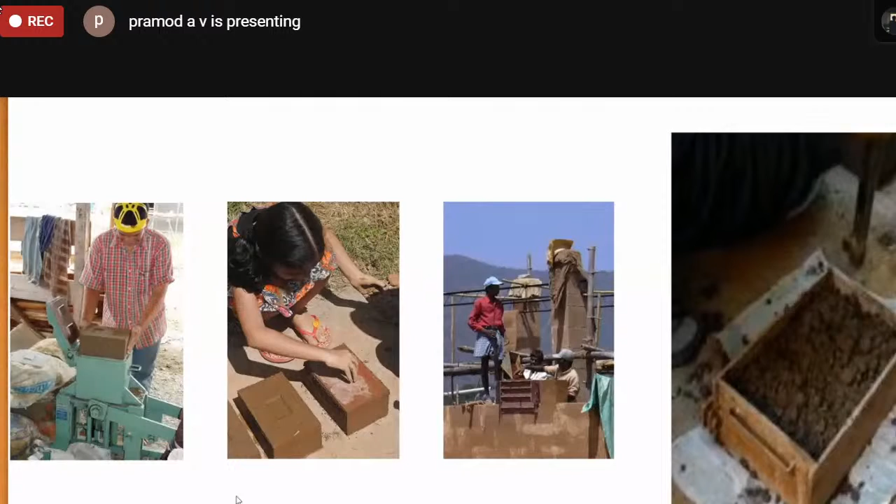Let us see how we do it. These are the materials which we normally use. What we try to do is process the construction and demolition waste into sand or fine aggregate and coarse aggregate. The construction demolition waste can be concrete, masonry, or plasters. So you try to process those wastes and utilize them in construction.

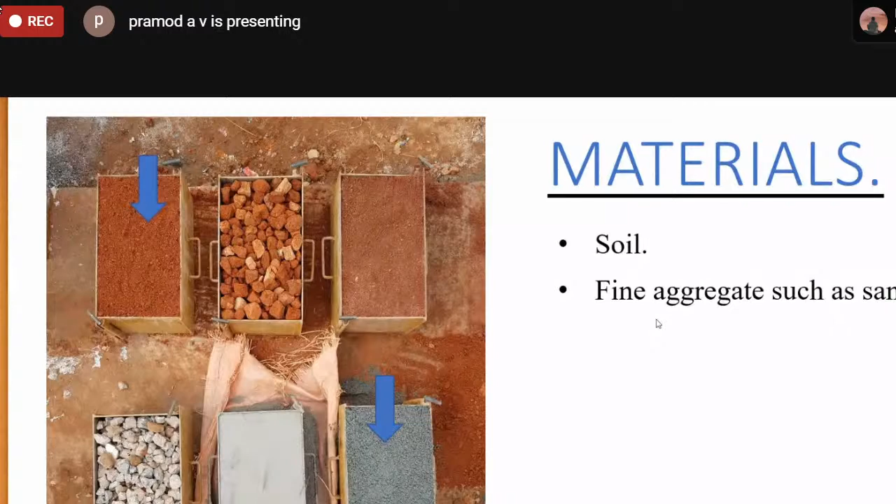So we use soil, we use fine aggregates, natural as well as processed, we use coarse aggregates, and we use cement and lime, again as stabilizers.

So the construction and demolition waste is being processed here. You can see in this example, the waste bricks have been processed into fine and coarse aggregates. Concrete is also being processed into fine and coarse aggregates. Nowadays, some industries can process regular C&D waste into fine and coarse aggregates as well.

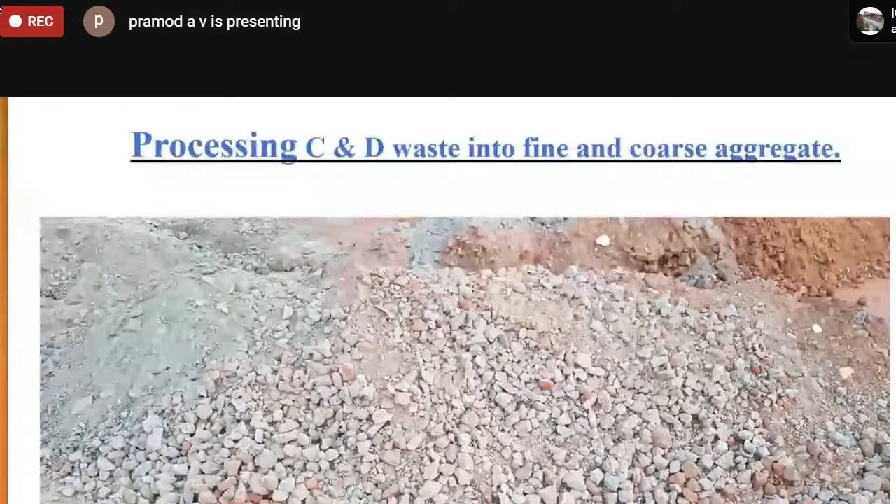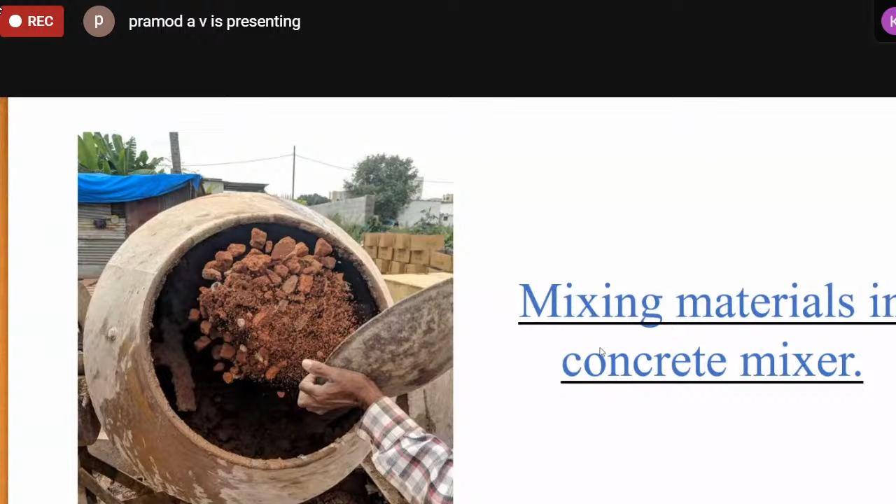Once we arrive at a proportion for mixing all those materials, we use a conventional concrete mixer and mix it like concrete. Once the mix is ready, we can either make precast blocks or do shuttering and pour the concrete, like with regular concrete, to build an in-situ wall.

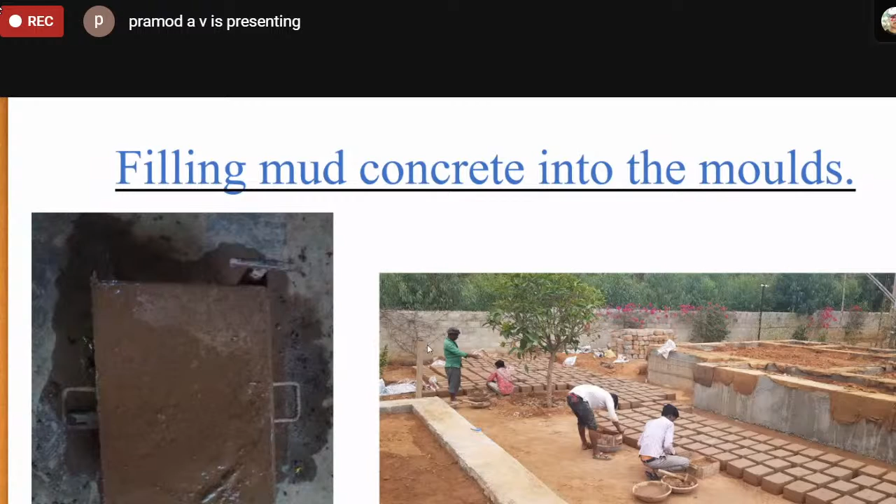If you want to make blocks, you use a very simple mold like this, fill the molds, and leave them on the surface for about a day. From the next day, you can start stacking these blocks. We have tested quite a few of these blocks, and they have given us strength of up to about 10 MPa, so we can do a proper mix design to achieve that strength.

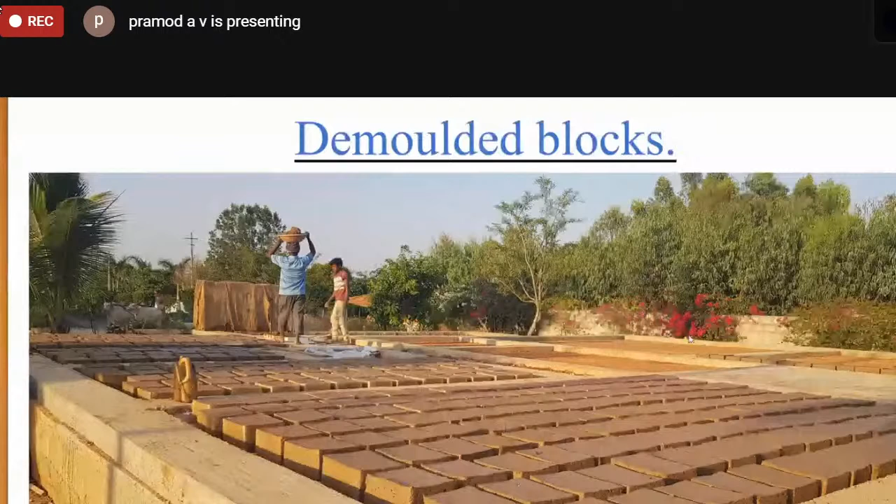Once we stack those blocks, we cure them properly. Because cement has been added, we cure it for about 21 to 28 days, but after 10 days we can start using it in construction. You add composite mortar, so the mortar also gets cured, and in the process the blocks get cured too.

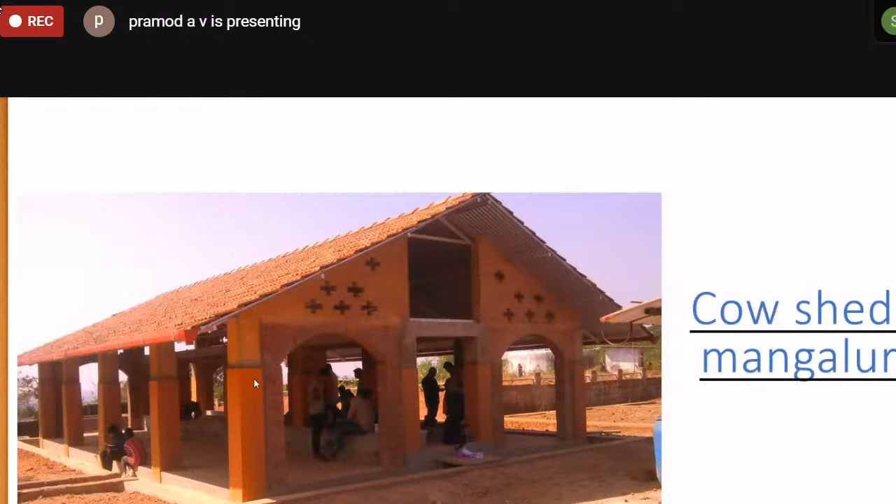Then an example of a cowshed was done at Mangaluru, with Subhash Basu sir involved as an architect. It was also painted by some artists. Nirmithi Kendra also has a demonstration unit using mud concrete techniques.

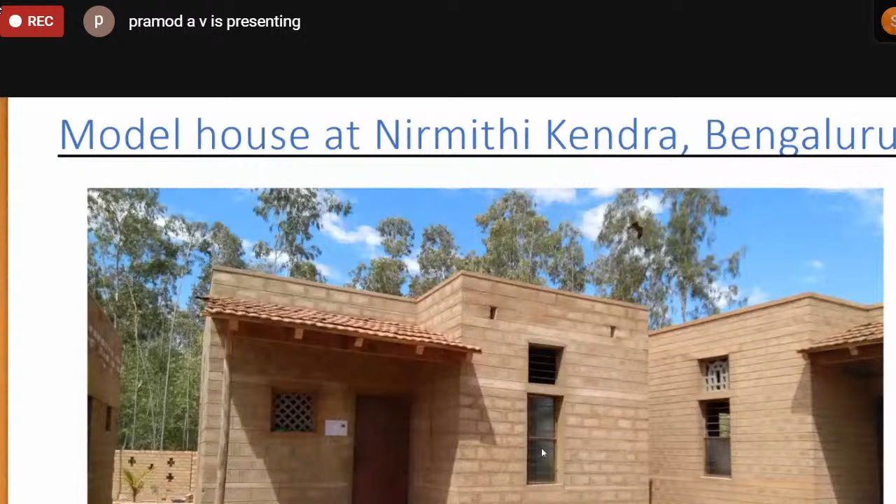Again at Sithilingi, there was a school construction started, along with a lot of well-digging process inside the village. That process generated quite a lot of soil which had a lot of gravel in it. If we had used that kind of soil in the other three techniques discussed earlier, all the gravel would have been considered waste. So we chose the mud concrete technique and utilized all the gravel particles into the construction.

These are some of the structures done using the mud concrete technique. Another important thing to note is that they spent close to 30 to 35 lakhs for the school construction, and close to 25 to 30 lakhs of that stayed within the village. The cash flow stayed within the community because local artisans and local materials were employed. Only a small amount, about 5 to 6 lakhs, was spent on steel and some cement or concrete that was purchased. These are some of the school constructions, and the majority of the buildings are made with mud concrete.

In the last part, we'll look at the different proportions normally used for construction. As I mentioned, all our mortar and leveling concrete proportions combine soil and lime. PCC, what we normally call leveling concrete, is usually done in the proportion of 1:4:8, where 1 is cement, 4 is fine aggregate, and 8 is coarse aggregate. Instead, on all our sites, we use a proportion combining soil and lime. This PCC is used in the foundation and in flooring—wherever leveling concrete is needed, we use this proportion.

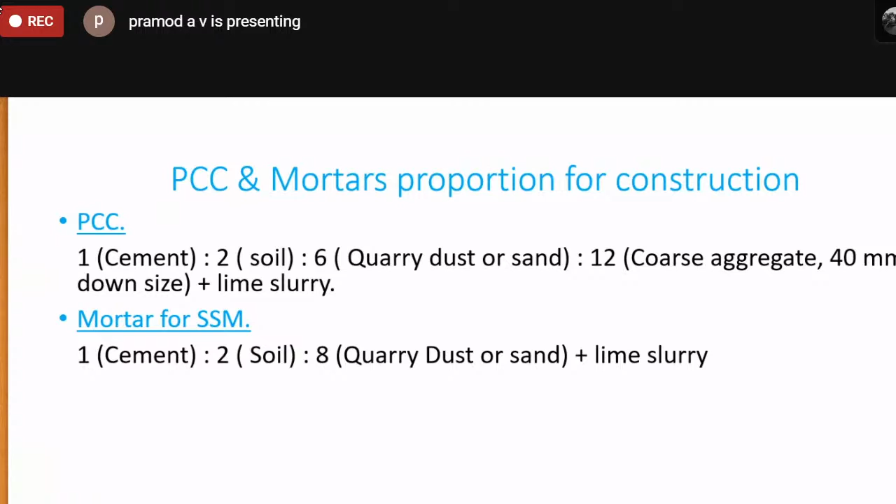Then we have different mortar proportions for size stone masonry, and different proportions for wall construction. Depending on the earthquake zones, even these proportions are varied to match that particular zone.

Then if you are doing any masonry, vaulted, or dome construction, you use a richer mortar mix, whatever has been produced. And for pointing, we have already seen the proportion.

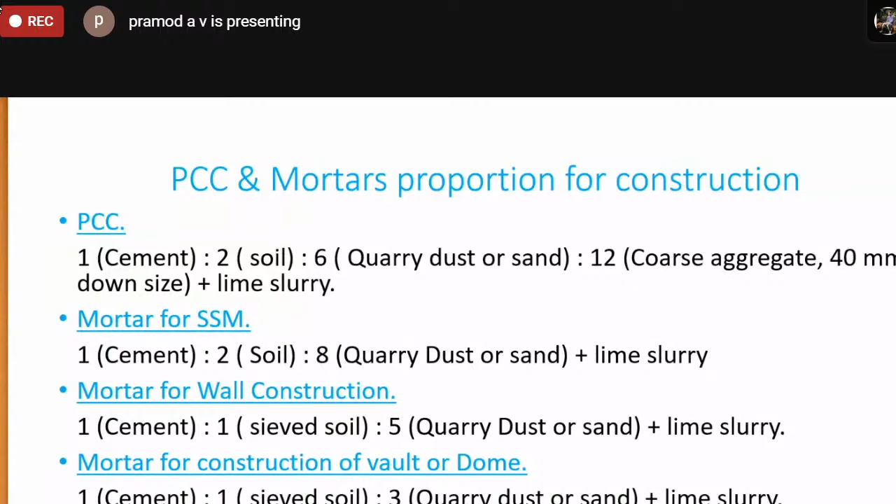Before I conclude, I'd like to say that I was also a student of Professor Lakshmikant, sir, at BIT. He taught me the basics of electrical engineering when I was doing my bachelor's at BIT. So thank you, sir. With that, I'm trying to conclude this presentation.

If you have any questions, maybe we can take those questions.

Thank you, sir. Thank you, Pramod sir and Yogananda sir, for the wonderful presentation. Lakshmikanta sir apparently is not here, he left for a meeting a few minutes back. I think he would have been really happy to know that you are his student. Anyway, I'll convey the message to him, sir. Yeah, thank you, sir. Thank you.

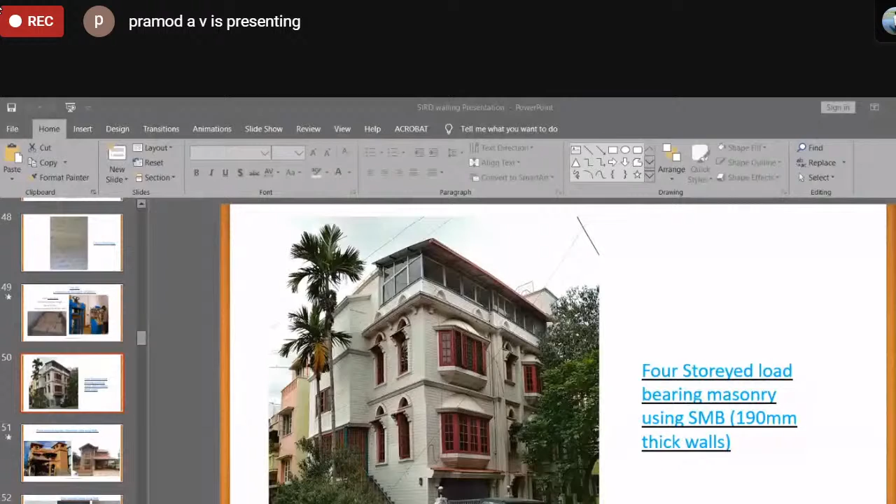Yes sir, thank you so much sir. Any other doubts? I think Ratan again has a point to make - he says that stabilized mud blocks make architects more artistic and engineers more flexible while designing.

Any views on that? Yeah, there is a lot of scope for architects and engineers to utilize this technology. In fact, it can give them a lot more opportunity to try masonry structures.

India is a country wherein we have demonstrated excellent load bearing masonry structures before, and even now you have 300, 400-year-old buildings which are still being used. For example, I visited IIT Kanpur a few years back, and they took me to a temple completely built out of masonry - no steel, no concrete, just brick and mortar. And it is 1,500 years old - Bhitargaon temple, just brick and mortar.

So it can survive, but I would like to add one thing: buildings have to be maintained. That is very, very important. That particular temple was taken by Archaeological Survey of India, and they are maintaining it. If you don't maintain a building, irrespective of any material being used, there will be issues. You convert a good quality building into a conservation project if you don't maintain it. That is the state of affairs.